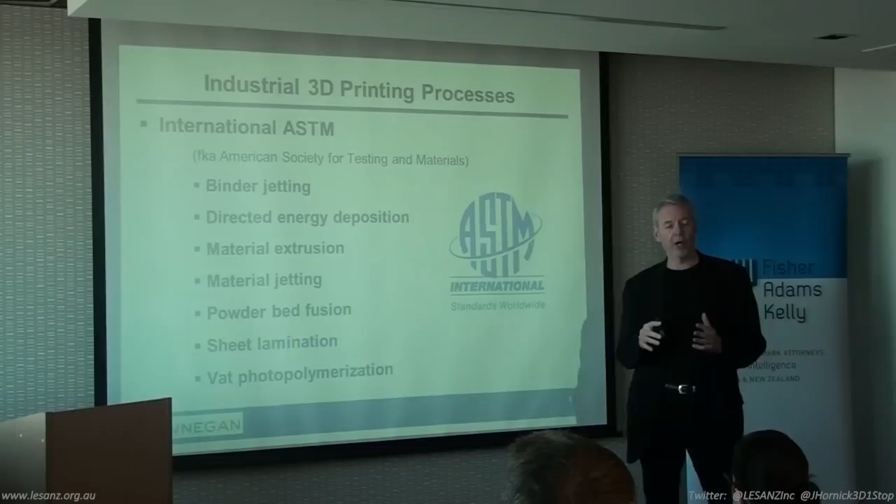These are the official terms. Very few people in the industry use these terms, and often they are not used consistently. I and a few others in the industry are trying to push the adoption of this terminology because it makes it so much easier to understand. I hope you'll see that as I go through this presentation.

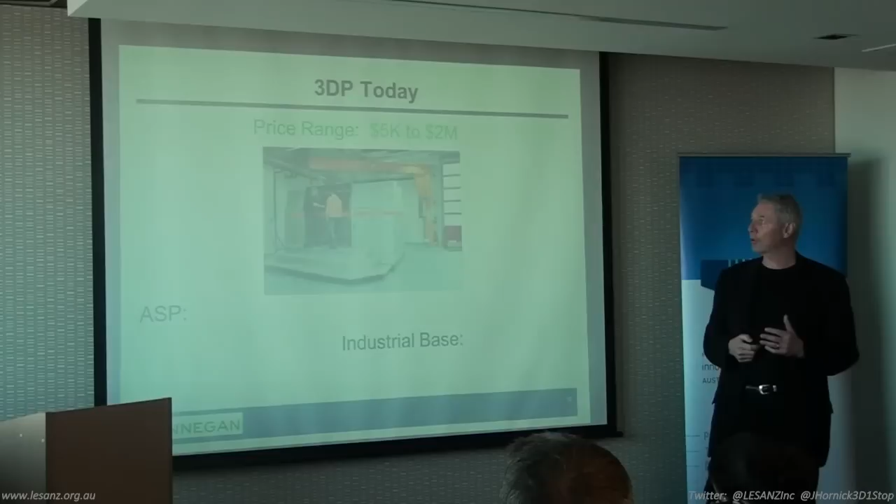Now, one thing I wanted to say about where 3D printing is today, which sets the record straight on this belief that 3D printers are these things that make Yoda heads, is that the price range for an industrial 3D printer—and that's an example of one of them, that's a Concept Laser machine there that you see, and it has a crane, because when you take the piece out of the bed that's made in this machine, or if you're filling up the bed with powder, it weighs 3,000 pounds. So you've got to have a crane to move the pieces in and out after they've been made. And the price range for an industrial 3D printer is anywhere from $5,000 to $2 million.

And the price range for consumer-grade printers is considered to be anything below $5,000. So the industrial machines, basically, they go up to $2 million. The average selling price, as of 2014, is $87,000 US. That's actually down from $90,000 the year before.

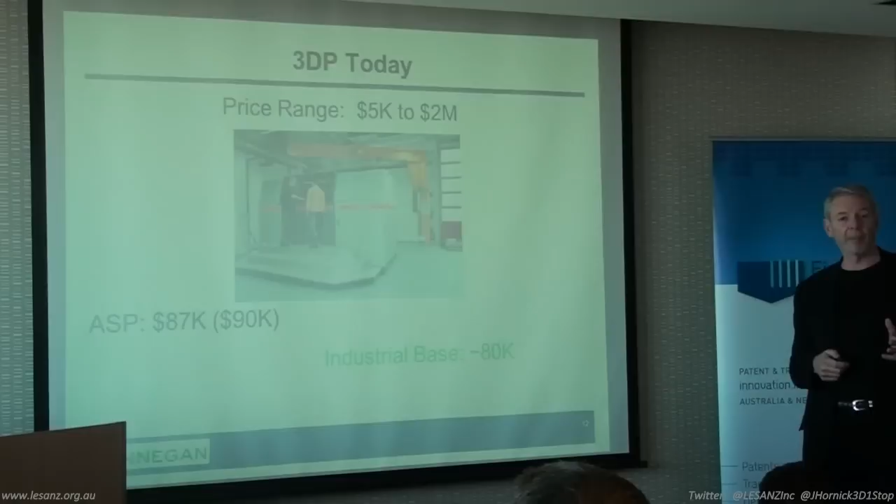And there are about 80,000 industrial-grade machines installed around the world. So there's a lot of them out there, and there are more and more all the time. The number of the prior year, I believe, was 67,000 machines. So there was an additional 13,000 industrial machines installed in 2014.

However, I kind of view the state of 3D printing technology as where the steam engine was in 1765. Now, there were steam engines long before 1765, but it was in 1765 that Watt created the first practical steam engine, and it was a great invention for its time. It was pretty primitive compared to where the engine is today.

And I kind of analogize 3D printers to where the steam engine was in 1765. Now it's not going to take 240 years to get the technology of 3D printers up to where the engine is today, because things are happening at an exponential rate now. But I think the technology is great, it just has a long way to go.

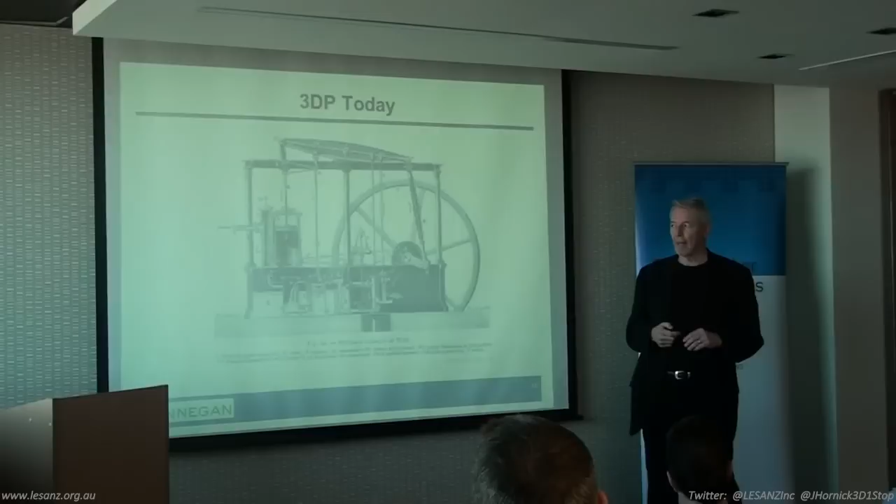Now, the first type of 3D printing technology on that list, and I go through them alphabetically, is binder jetting. Binder jetting is kind of like 2D paper printers, where you're using these inkjet heads, and what you're jetting out of those heads is a binder, and you're jetting it into a bed of powder. That powder could be a polymer, or it could be metal, or it could be ceramic, or glass. So you have a bed of material, and you're jetting the binder onto that material layer by layer, and you're building up a product or a part by gluing it together, essentially.

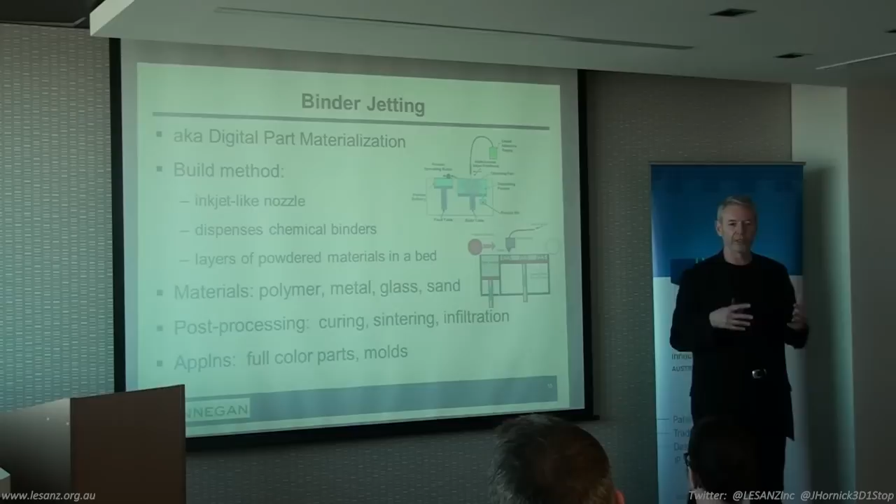And after the parts come out of the machine, they all need some kind of post-processing. Another kind of myth is that when a part comes out of a 3D printer, it's perfect, it's beautiful, you can use it right away, and that's not true.

Every type of technology you'll see today has some post-processing involved. With binder jetting, there's curing, sintering, and infiltration involved. I'll talk about that in a moment. But one of the great things about this process is that you can make full-color parts.

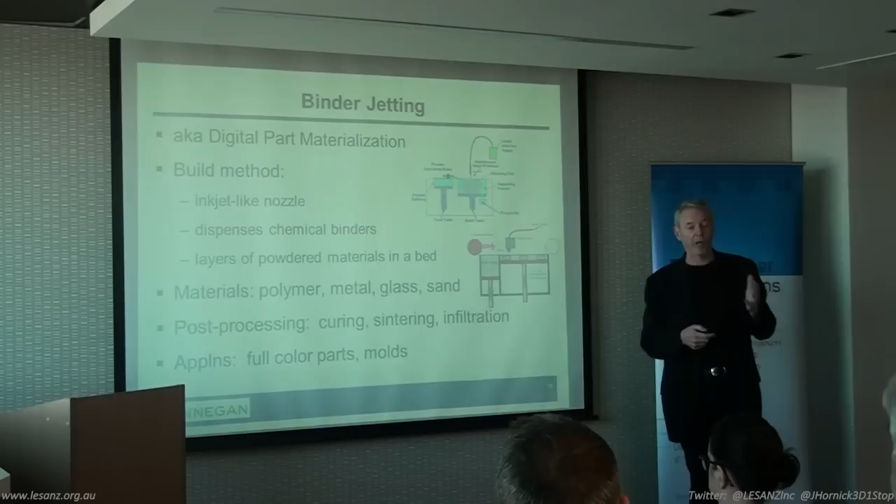Here's some examples. 3D Systems, one of the top players in the industry, is what I call an organic company—it's grown up purely in the 3D printing industry. It's not like an outside company that manufactured products for years and then decided to get into 3D printing, like HP. I'll talk about HP as I go on. 3D Systems is homegrown in the 3D printing industry.

They have machines called ProJet. They're US-based, and they have machines with different build volumes—some are small and some are large, so you can build big things. They build their products with acrylate powder, and that's what's in the bed, acrylate powder.

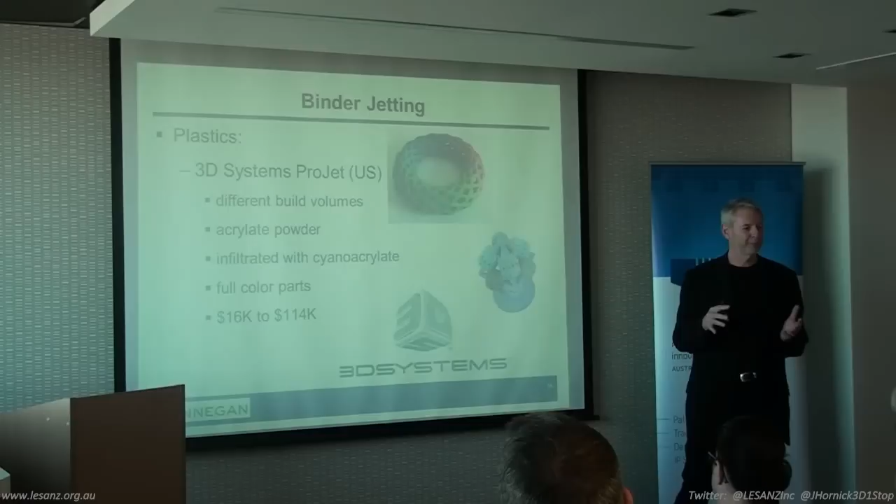After the product is made, it's infiltrated with cyanoacrylate. Does anybody know what that is? It's crazy glue—that's what we call it in the U.S. These machines run from about $16,000 to $114,000. Prices might be slightly varied this year; these are 2013 prices. Now, that's a plastics machine.

Another plastics machine is made in Germany by a company called voxeljet. The beauty of the voxeljet machine is it's continuous build—you start building in one end and the parts come out the other end. They used it to print this James Bond Aston Martin DB5. They made three of these for the movie Skyfall.

This machine uses polymers or sand, and it cures at room temperature, which is great because the products don't need heat treatment—they don't warp. You can see these machines are fairly expensive, $150,000 to almost $2 million.

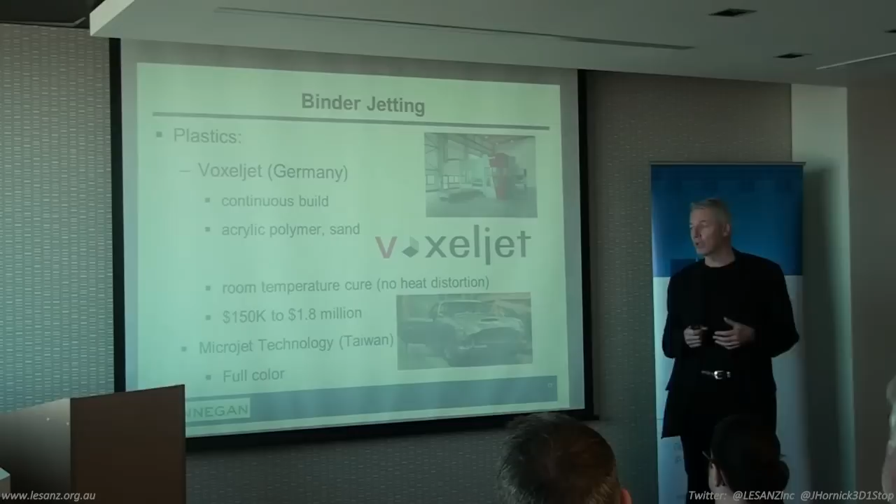There's another company in Taiwan called Microjet Technology that has a full-color binder jet machine. Now there's also metals in this area—it's not just plastic parts.

There's a company outside of Pittsburgh in the United States called ExOne. They also have offices in Germany, and they have a fairly large build volume. As you can see, they use all different types of powders: bronze, Inconel, iron, stainless steel, and also tungsten, glass, and sand. When these parts come out of those machines, they are infiltrated with bronze.

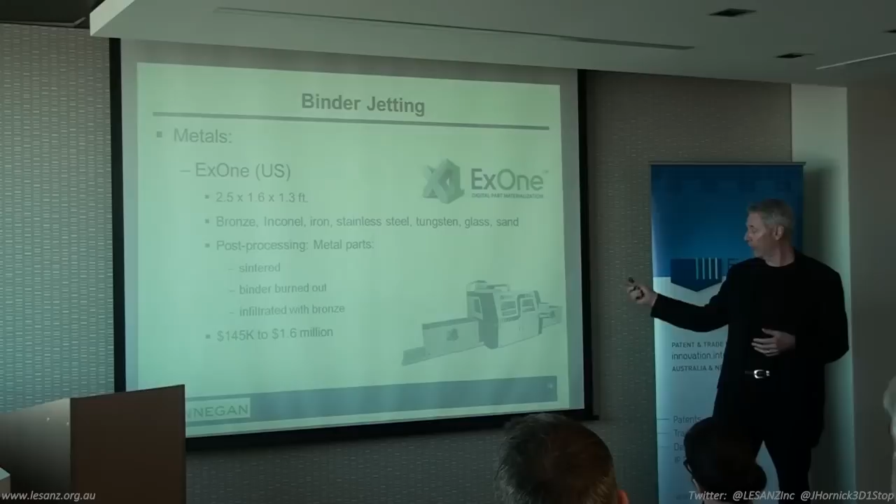First the binder is burnt out—they're heat treated to burn out the binder. Then they're infiltrated with bronze to make the part 98% dense. These machines, again, are expensive: roughly $150,000 to about $1.6 million. As you can see, they're big machines.

Now, this binder jetting technology is what was originally called 3D printing. Eventually, the term 3D printing became an umbrella term for all these different processes. But this is the original, quote-unquote, 3D printing process, which was developed by MIT and licensed to ExOne. It was also licensed to a company called Z-Corp. Z-Corp was later acquired by 3D Systems, and then they sub-licensed it to VoxelJet.

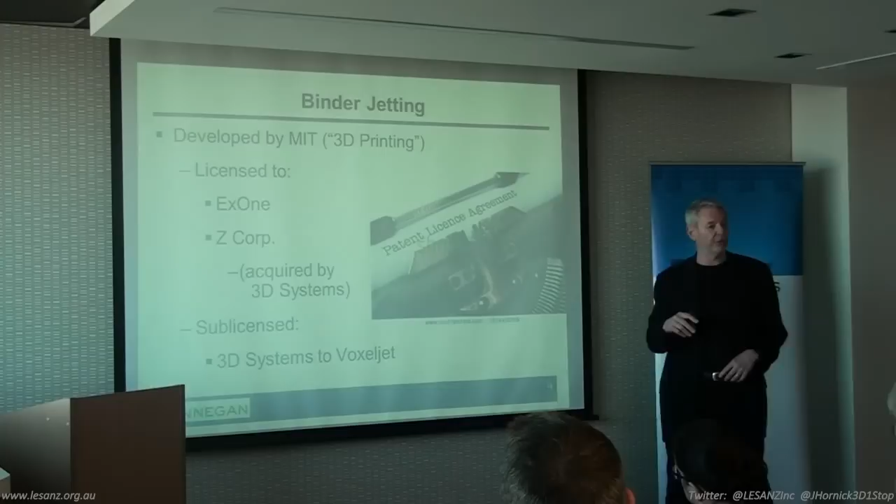So what you can see is that all the companies operating in this space, or almost all of them, are licensed by each other or cross-licensed in some way. That's a good thing in that it has enabled the technology to move forward without litigation, and I think litigation would interfere with adoption. So it's good there hasn't been much litigation. But the bad thing, I think, is that because of the cross-licensing, there hasn't been a whole lot of incentive to innovate beyond whatever technological path they happen to be on.

So they're going down these paths—you have incremental improvements, machines are getting better and better, but nothing amazing or new is coming. This technology has been around for 30 years. Well, this one hasn't, but 3D printing technology in general has been around for about 30 years.

Now, the second type of process is directed energy deposition, also known as blown powder, and also known as laser cladding. Different manufacturers do different types of processes. With binder jetting, each manufacturer is basically doing the same thing—they're spraying a binder onto a powder bed, and they're building up a part layer by layer.

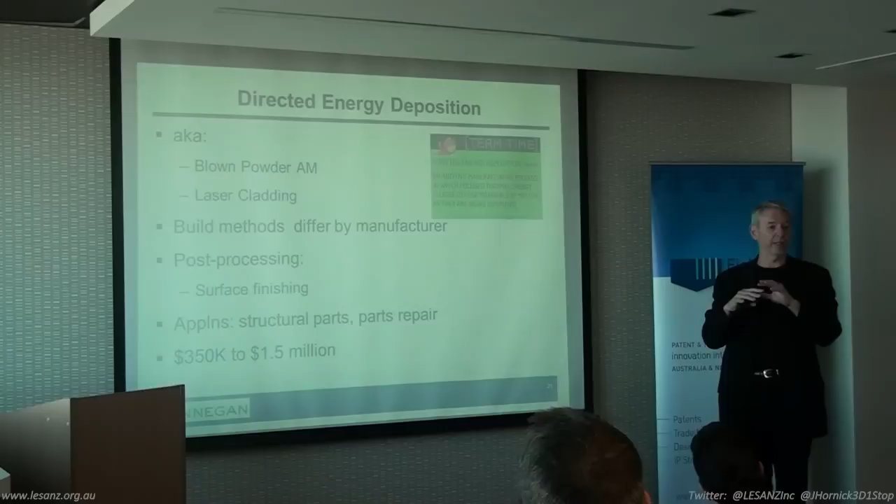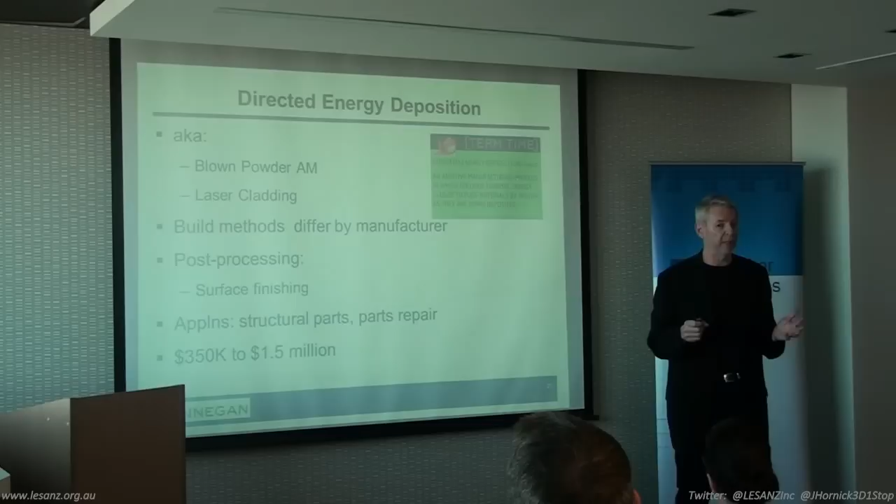With directed energy deposition, you have different manufacturers doing basically different things. The parts that come out of the machines have to be finished, they need some surface finishing done to them. But the parts are very strong, so you can make structural parts, and it's good for repairing parts. These machines range from about $350,000 to $1.5 million.

One of the companies in this space is called Optomec, in the United States, in Albuquerque, New Mexico. They have their own process called laser engineered net shaping, or LENS, L-E-N-S. This is their term, it hasn't become generic, but it is one of these alphabet soup acronyms that you hear. You might hear laser engineered net shaping, or LENS, but it's really a type of directed energy deposition.

Here, what happens is you have these inkjet heads that spray powder through the inkjet head to the focus of a laser beam. So you have a laser beam and the inkjet heads together, spraying powder to the focus of a laser beam and depositing that. You're depositing kind of a fused material with the use of that energy at the same time, and you can build it up in any shape, on any shaped substrate.

This process was actually used by RMIT University here in Australia to repair turbine blades for a company that formerly bought hundreds of turbine blades every few years, and spent hundreds of thousands of dollars to do that. They started using the LENS process to repair those blades or replace them. So this is great for the company that needs the blades. Terrible for the company that sells the blades.

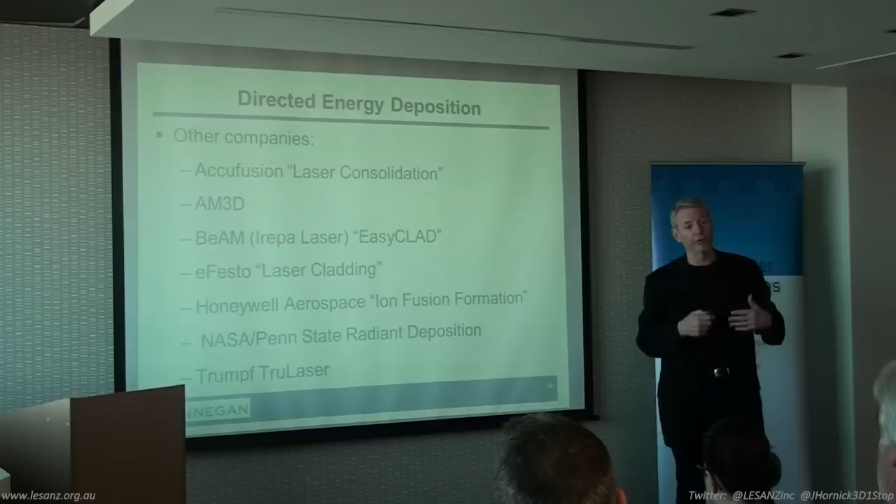There are some other companies in this space, some who sell products and some who don't. NASA doesn't sell a product. Honeywell has something they call ion fusion formation, but they don't sell a machine either, they just use the process in-house.

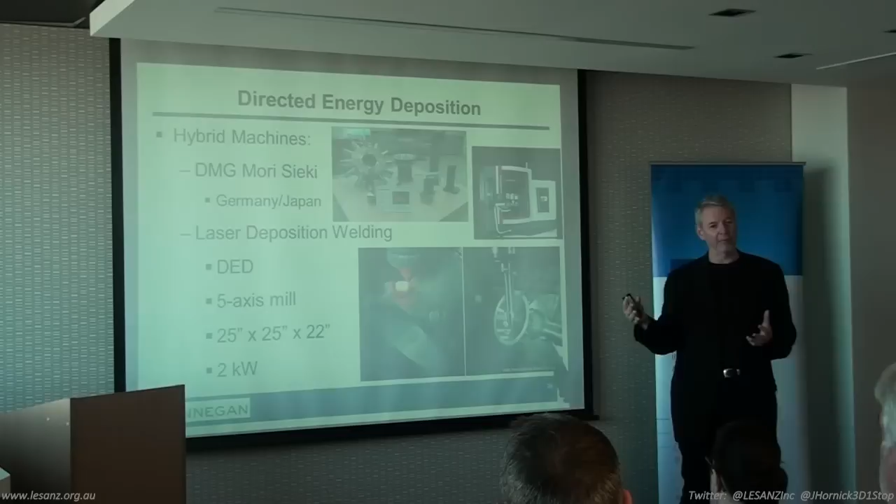There are some hybrid machines. There's a company called DMG Mori Seiki, which is a joint venture between DMG in Germany and Mori Seiki in Japan. Their alphabet soup process is called laser deposition welding, that's their trade name for it, but it's really directed energy deposition. They combine their deposition head with a 5-axis mill, and mill the parts as they go along.

The parts that come out of this machine are just beautiful. This is a rough part, this is what it looks like when the material is being deposited with the directed energy deposition process, and this is what they look like after they've been milled as they go along.

And they're just beautiful parts that come out of this machine. Yamazaki Mazak just came out with a machine that's very similar. It combines a milling machine with a directed energy deposition head.

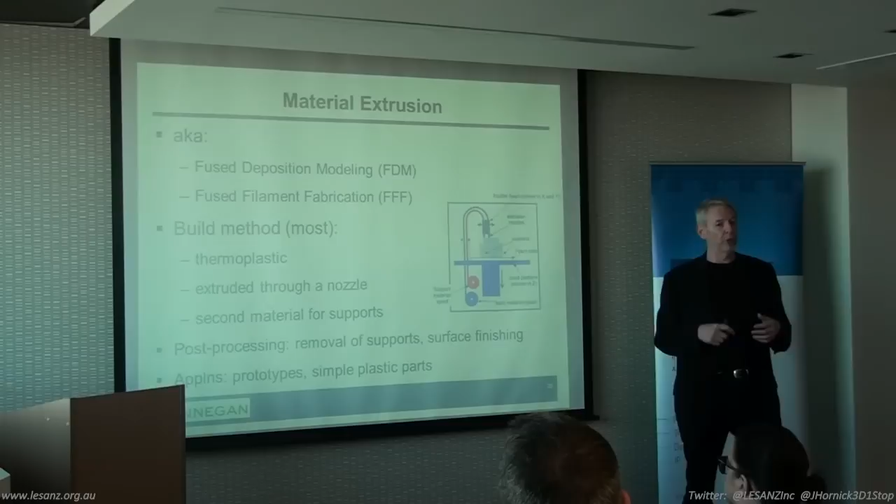Now, material extrusion is the next type of process on the list, and this is also known by some alphabet soup names: fused deposition modeling, FDM. That's what you hear most commonly, and that's what people use mostly in industry. Also, you'll hear fused filament fabrication, FFF. But again, it's all a type of material extrusion.

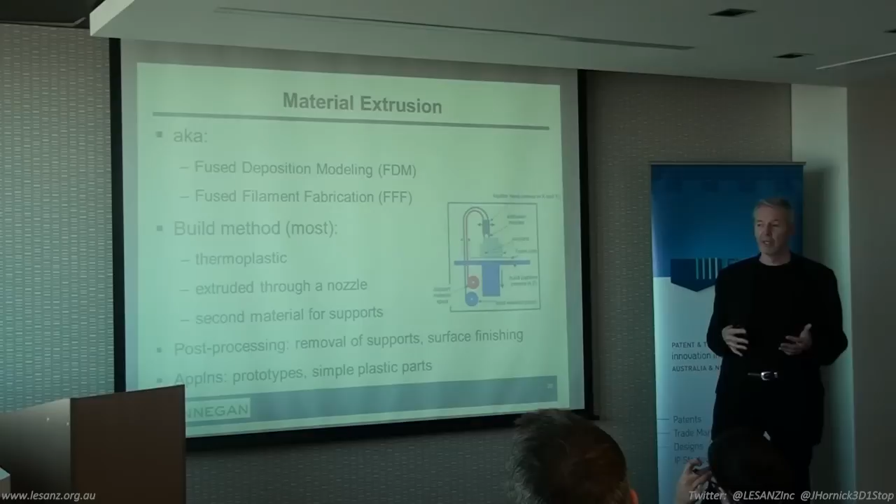Here what's happening is the thermoplastic is being extruded out of the heated extruder head and onto a print bed. The print bed may be heated or not, depending on the material you're using. If you're using PLA, the print bed is not heated. If you're using ABS, it is.

In this process, you may also be extruding a second material through a second print head to have support. So if you're building anything with an overhang, you have to build supports under it so they don't droop. After the part is made, you remove that support material. It's often soluble support material, so it's removed with either water or a solvent.

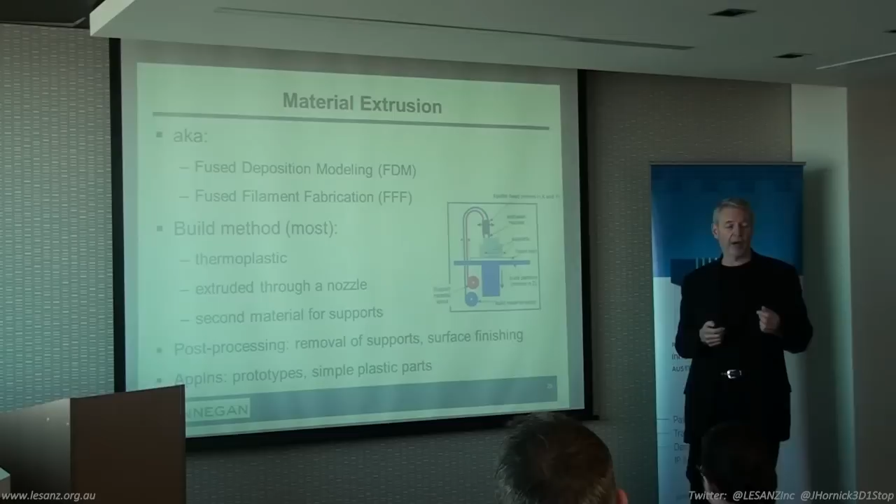And again, these parts need to be surface finished as well when they come out. You know what these look like—the Yoda heads that come out of the consumer grade machines. On the industrial level, there's much finer resolution, but you can still see the layers, and you need to do surface finishing. So these types of machines are great for prototyping and for certain types of end-use parts, if they're just simple replacement parts like a handle or something like that.

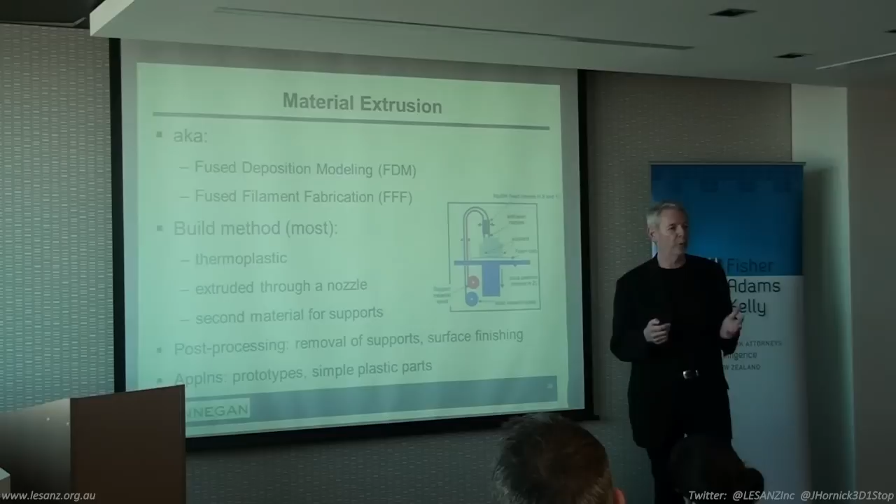There are all different types of thermoplastics used here. Some of them are proprietary and some aren't. This is the most used 3D printing process in the world for two reasons: one is because of all the consumer grade machines that are out there, and the other is because the high-end machines out there are used for prototyping.

Up until a few years ago—and this technology has also been around since the 1990s—all of the work done in this area was called rapid prototyping or direct digital manufacturing. It's only been very recently that everyone started calling it 3D printing or additive manufacturing. But this is the type of machine that's been used for rapid prototyping for many, many years.

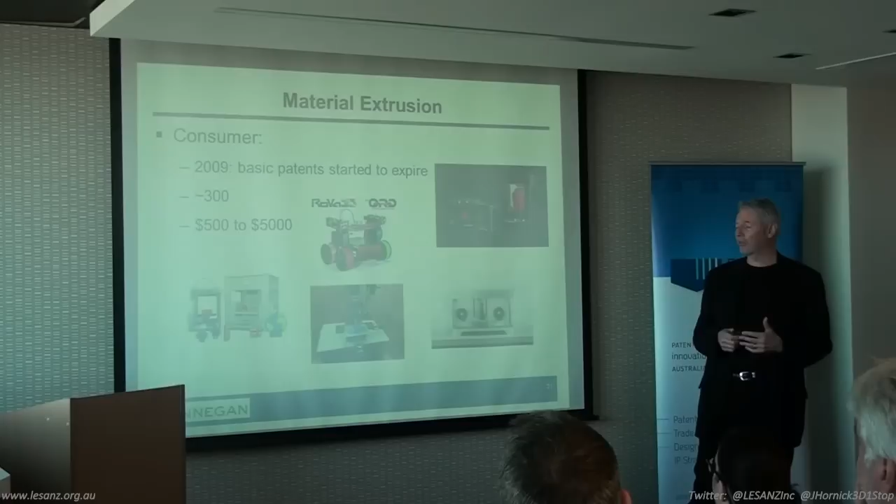Now, even though this presentation is about the industrial side of 3D printing, I just wanted to give you a flavor of the consumer side. These are consumer machines, and in 2009, the basic patents in this space started to expire. Stratasys had the first patents. In 2009 they started to expire, and even slightly before that, some startups started to enter this space, especially open source.

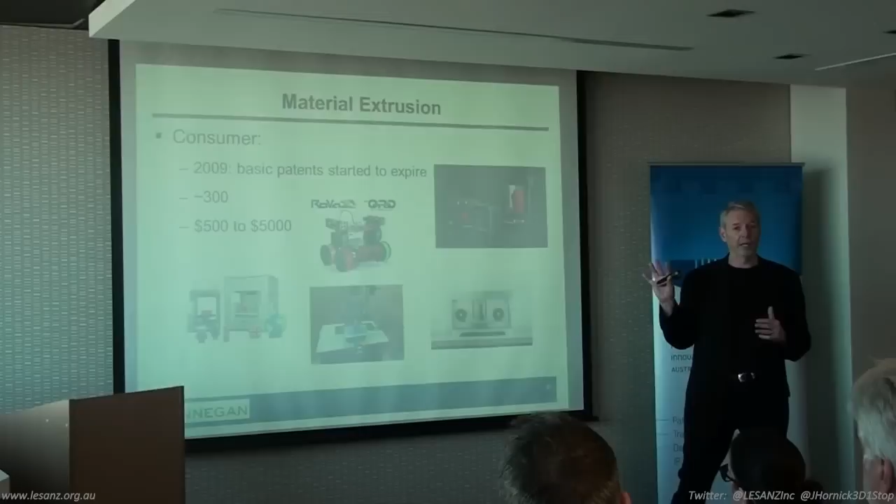So there's at least 300 companies out there making consumer grade machines—at least 300. They're almost uncountable because many of them are startups doing Kickstarter campaigns or Indiegogo campaigns, and nobody really knows how many they're selling or even how many there are. They're all over the world, everywhere. And these machines go for $500 up to $5,000.

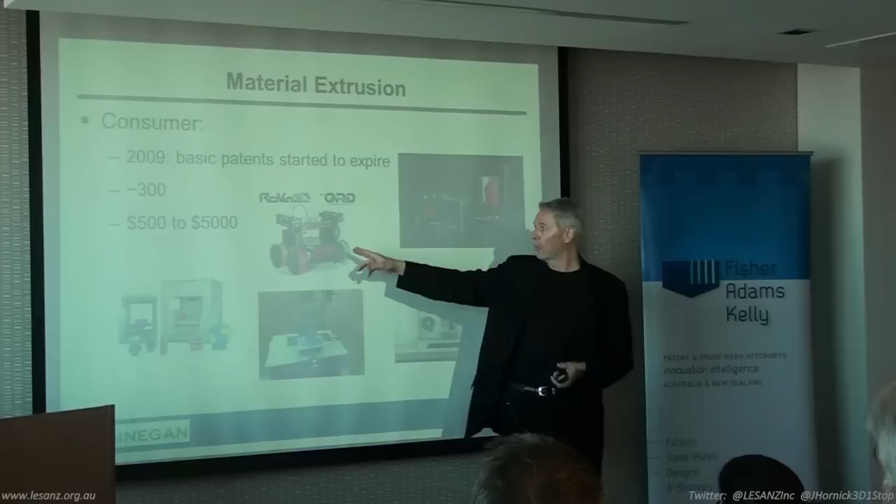I've given you a couple of examples. This one here is called the Rova 3D. It can print in 5 different materials, 5 different colors, at the same time. That one's, I think, a little less than $5,000.

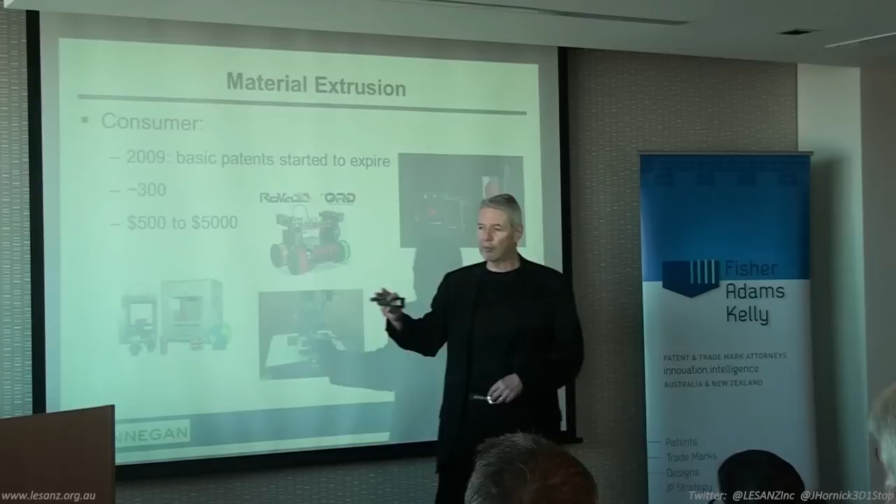These are the 3D Systems machines, and they have machines that run from about $1,200 up in the consumer space. And then here we have MakerBot.

This is a well-known brand, now owned by Stratasys. It started out as an open source project when—or maybe shortly before—they were acquired by Stratasys. They closed their system, filed a bunch of patent applications, really annoyed everybody in the industry who said there's plenty of prior art for this out there, but that just created a huge burden for the open source community to challenge these patents. They have a range of machines that run from about $1,800, $1,900 up in the consumer space.

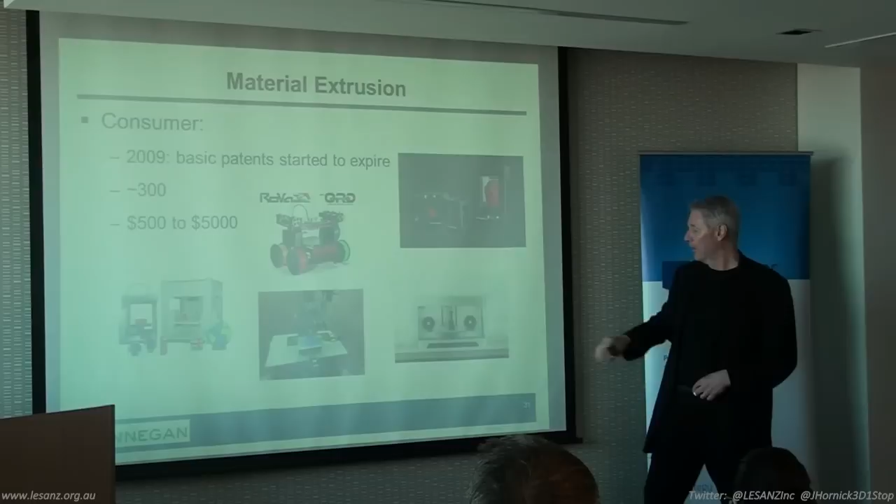This machine here is called Markforged 3D. It extrudes both thermoplastic and carbon fiber filaments, so you can reinforce whatever it is that you're making with carbon fiber. And this one sells for about $5,000.

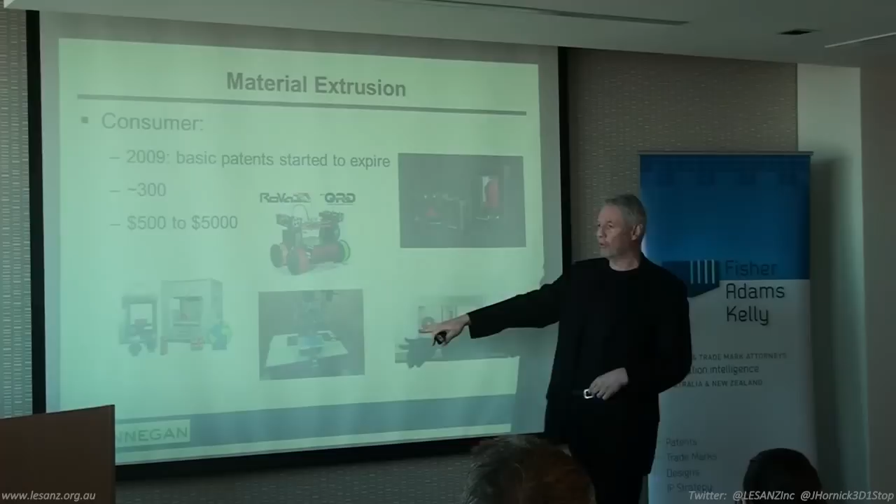This one here is very interesting - this is the Luminar Tribot, which sells for about $5,000. It combines material extrusion, CNC mill, and injection molding into one consumer-grade machine, which is pretty exciting. So that's taking a look at the consumer side of material extrusion.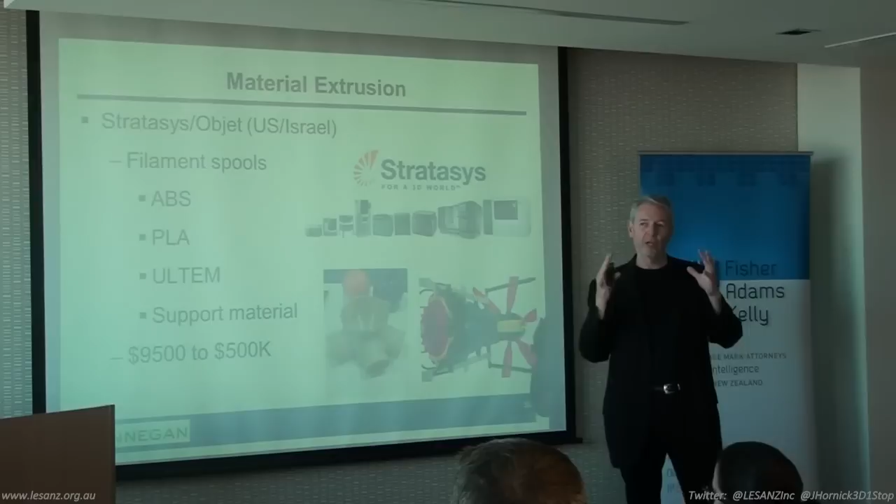Now on the industrial side, we have Stratasys, which I'd say is the top player in this part of the industry. It was a US company from Minnesota that merged with an Israeli company called Objet. Objet is really the tail wagging the dog, so this is now considered an Israeli company. At one time, the big chunk of the material extrusion market was US; after that merger, the big chunk is now Israel.

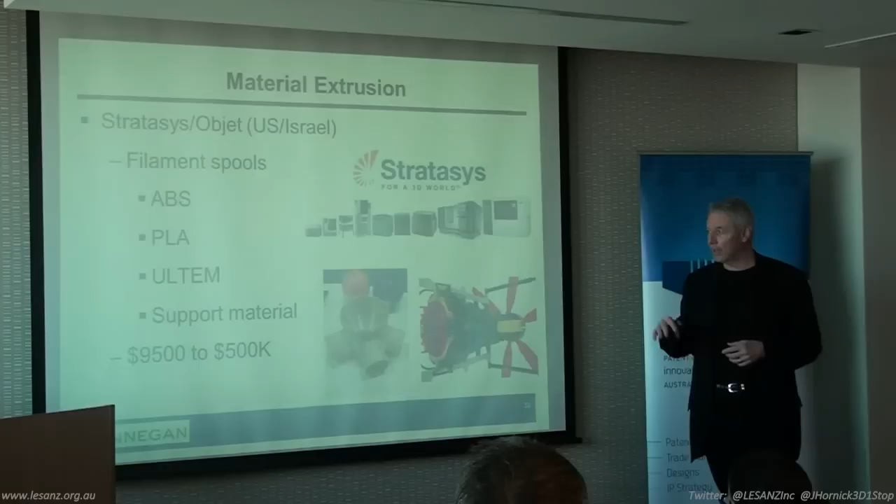They have a whole range of machines of different sizes. They 3D printed this prototype of an engine using a material called ULTEM, which has great fire and smoke resistance. The material comes in spools fed into the machine, and they also support support materials, like I said before, for building with an overhang. The machines run from about $10,000 up to about $500,000.

Now there's a company in Germany called Arburg, which makes what they call a Freeformer. It has a stationary nozzle and a 3 or 5 axis bed. The bed moves, the nozzle stays still, and it deposits droplets of material at very high speed - so it's kind of spraying out droplets rather than extruding through a nozzle, shooting material out at high speed. It's similar to a process called ballistic particle manufacturing, which I'll get to in a couple of minutes.

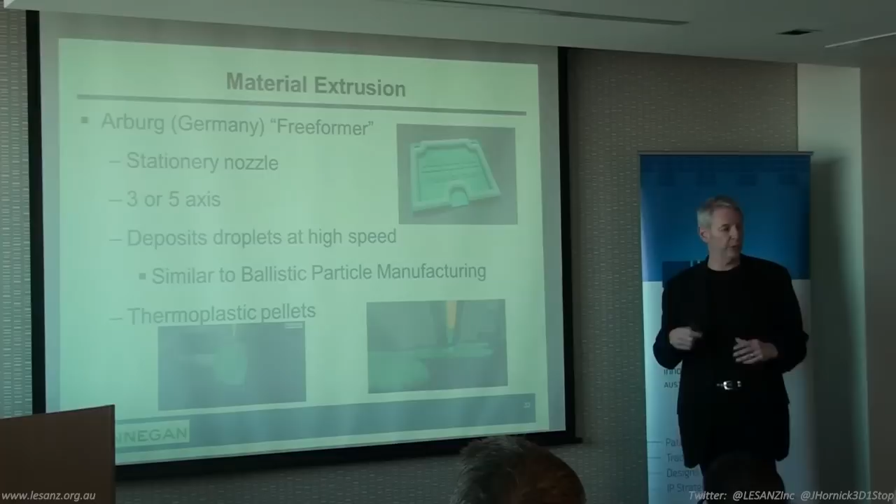What's significant about this machine is it doesn't use rolls or spools of filament. Instead, it uses injection molding pellets, thermoplastic pellets used in injection molding machines, so the cost of materials is much, much lower. But I think the parts built up with this machine are actually fairly primitive and rough, so it's hard to say what kind of market they're going to have.

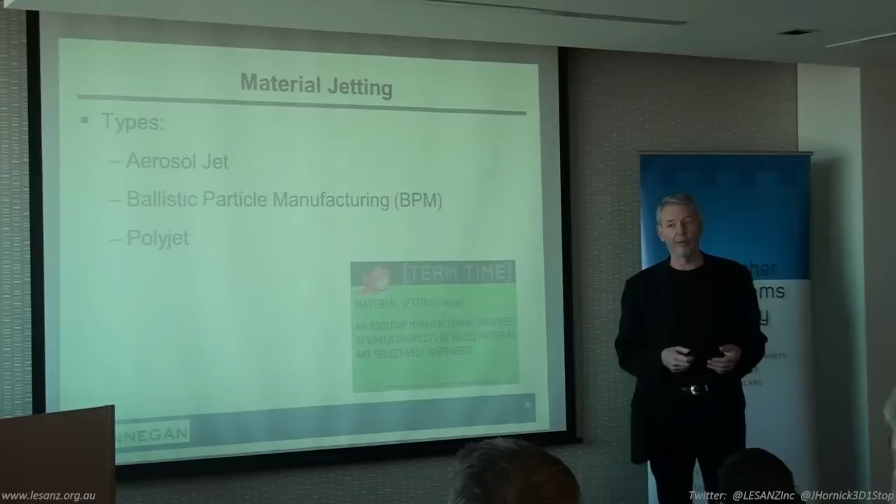Now, material jetting - remember at the beginning I mentioned binder jetting, where you're spraying glue onto a bed of powder, building up the part layer by layer. Material jetting is actually jetting the material itself through a print head, like you'd have on a 2D printer. There are different types of material jetting processes, just like with directed energy deposition, where there are also different types of processes.

One of those is aerosol jet - I'll talk about that. The other is ballistic particle manufacturing, and the third is PolyJet.

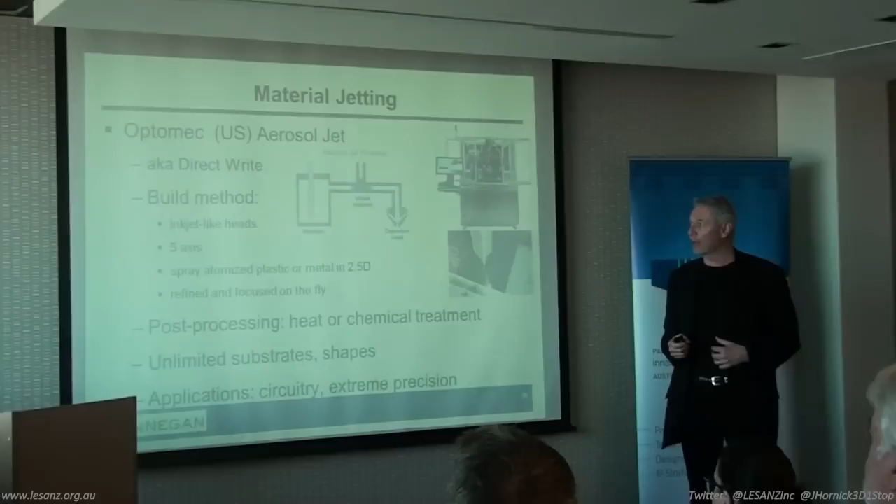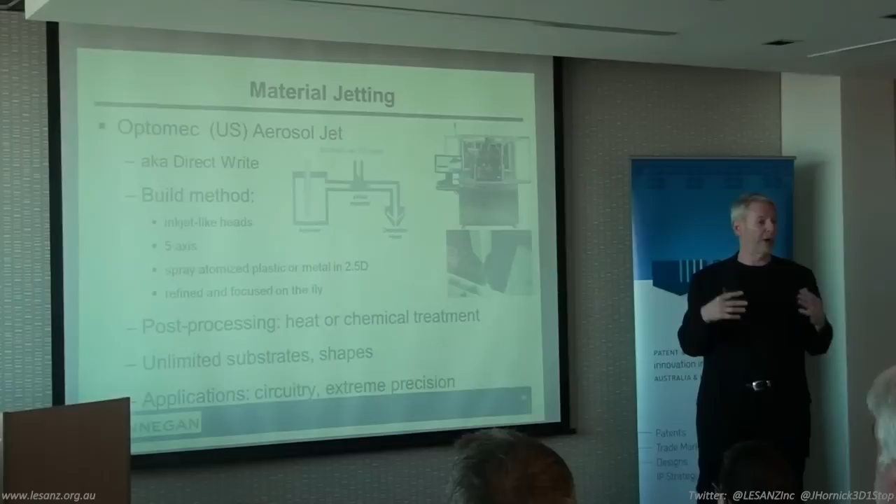Now, Optomec, which I mentioned earlier because they have a directed energy deposition process - a US company - they also have an aerosol jet process. The alphabet soup used here is direct write, or DW, so companies that do this type of 3D printing are often called direct write companies. The method is that you have heads like inkjet heads you'd have in a 2D printer, and they're spraying out the material itself.

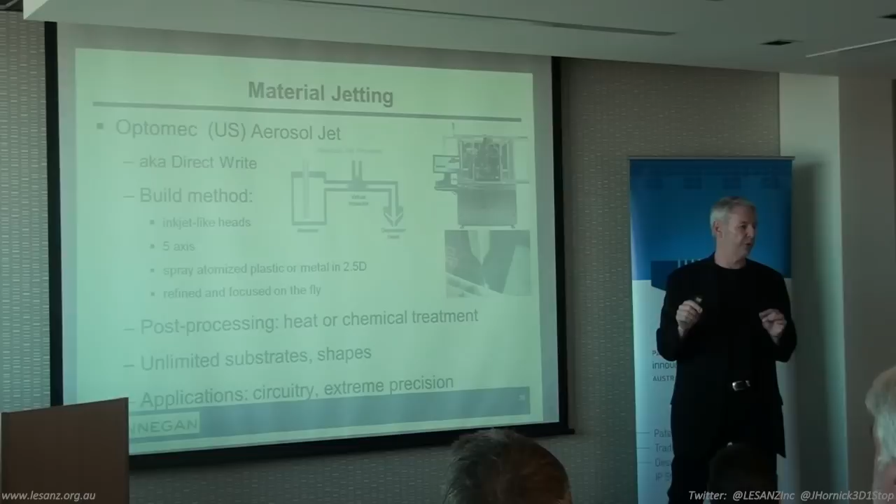Onto a print bed, it's really sometimes referred to as 2.5D printing - I'm talking about this type of material jetting called aerosol jet. This process is often used for repairing things or for printing circuitry. So basically you have some thickness to what you're printing, so it's not purely 2D, but it's also not building up a 3D product, so it's often called 2.5D. You can print onto any substrate, any shape. It's great for when you need extreme accuracy, and great for circuitry. The post-processing here is heat or chemical treatments.

Now, there are some other direct write companies out there - strangely, 3 of them are in Israel. One's called Camtek, there's also one called XJet and Nano Dimension. There's a company called Argentum, which I thought until very recently was a US company, but this is actually a consumer-grade electronics 3D printer maker that's an Australian company that has just moved to the US.

And the reason I know that is, Bob, you sent me an article just a few days ago saying this company was moving from Australia to the US, and you said it's a common problem, right?

Until I got that article, I thought this company was a US company. But what they've created is a consumer-grade PCB printer, printed circuit board printer, that sells for about $1,400. They had it on a Kickstarter campaign, and the machine is called an Argentum. I think the company is called Cartesian, and they started out here and are apparently moving to the US.

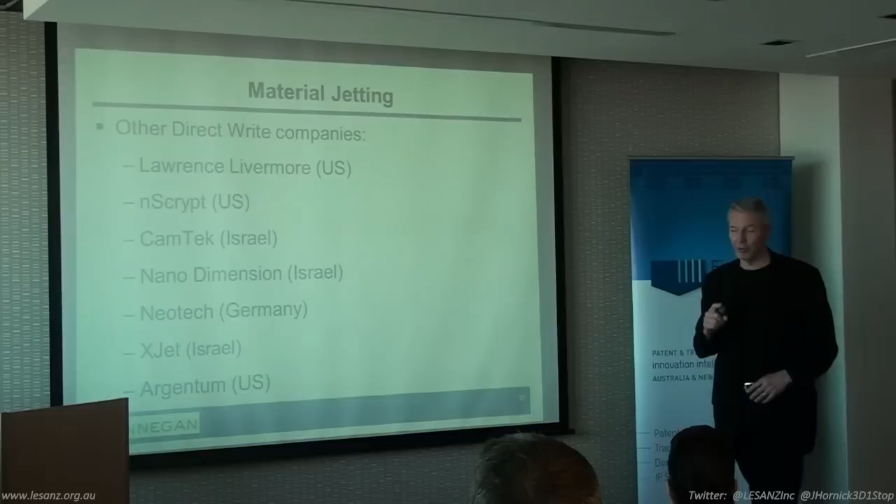They have not delivered any of their printers yet, though. The Kickstarter campaign was almost 2 years ago. So I think they're here in Brisbane, or they were here. They were in Brisbane, and now they're moving to the US. But again, I don't think they've delivered my printer. I don't think they've delivered any printers yet.

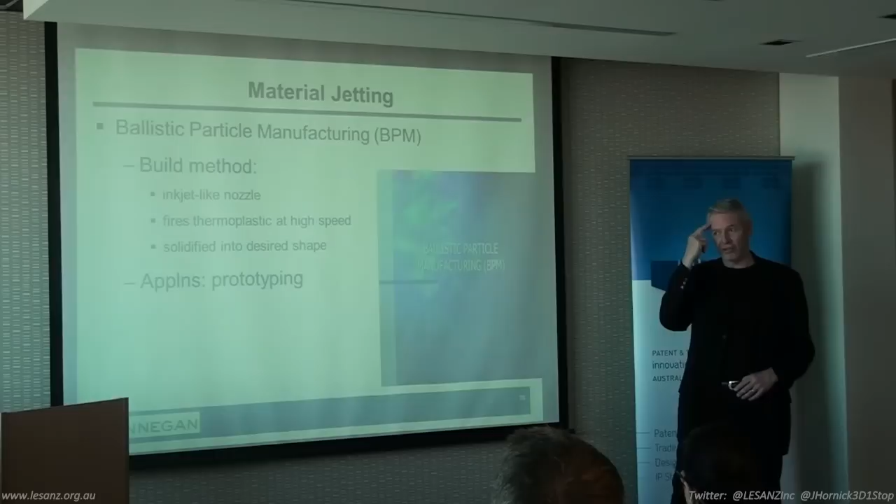Now, ballistic particle manufacturing (BPM) is a type of material jetting process that, as far as I know, no one is doing now. But there was a company called BPM in South Carolina in the United States doing this process. Here you had an inkjet-like nozzle firing thermoplastic at really high speed, and just from the firing of the material you were building up a part. They were doing this with plastics. I'll tell you why that's important in a moment. This was good for prototyping, but you got kind of rough parts out of it. Like I said, there was a company called BPM in South Carolina in the US.

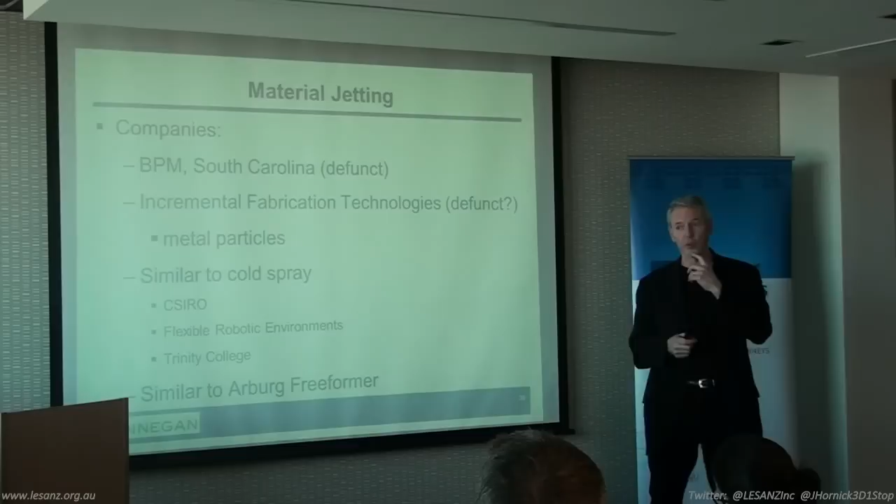It's out of business. There was also a company called Incremental Fabrication Technologies that was doing this with metal, and I believe they're extinct. I can't find any evidence that they still exist. But what's significant about this, I think, is that it's very similar, at least what Incremental Fabrication Technologies was doing.

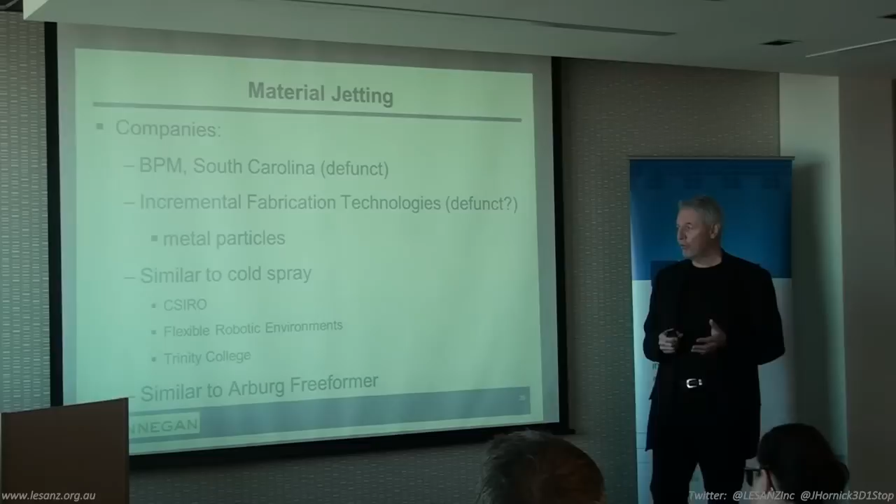It's similar to what CSIRO is doing in its cold spray process. CSIRO has taken cold spray, which has been around for years, and developed their own proprietary process around it. They're doing some incredible things, which I'll show you a little bit later. There's a company in South Dakota in the US doing cold spray called Flexible Robotic Environments, and then Trinity College in Ireland is also doing a version of cold spray.

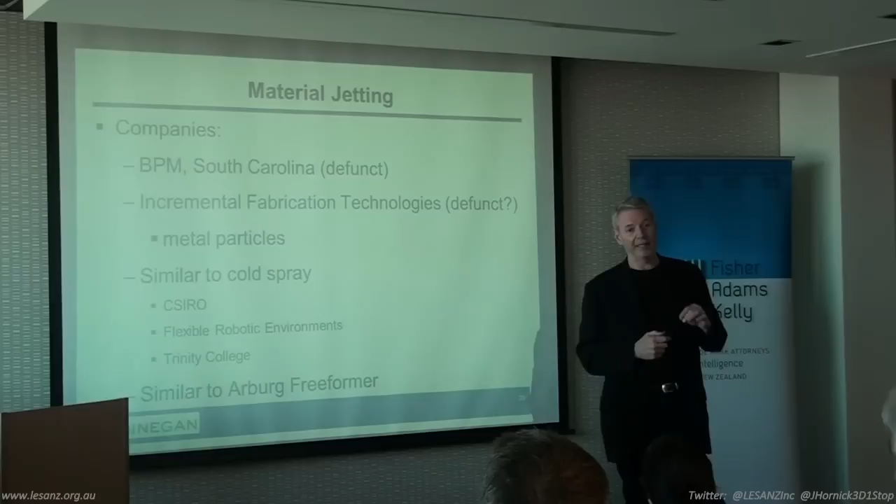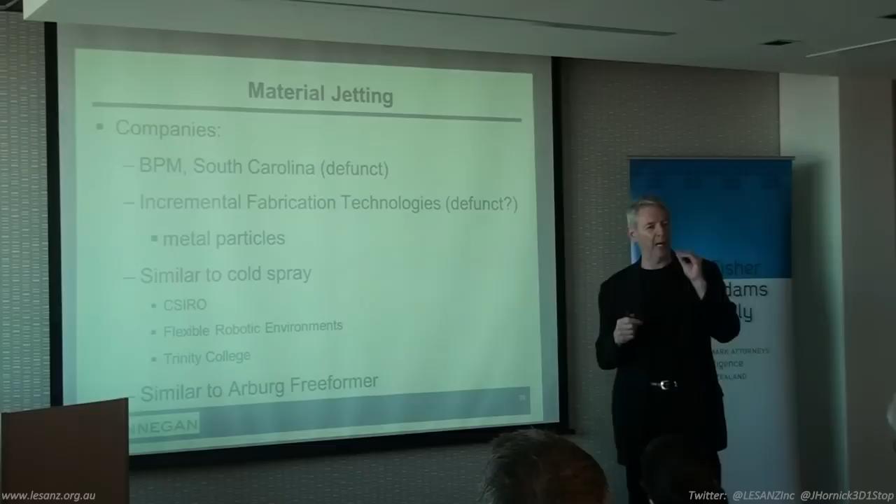What they're doing there is spraying metal powder at high speed and building up parts from it with no heat at all. Just the velocity of the particles causes them to plastically deform and bond. You build up these incredible parts just by hitting powder into other powder with no heat involved at all. It's pretty incredible, and it's similar in some respect to the Arburg Freeformer, because that's spraying out particles of powder as well. So I think what's important about all of this really is prior art. To the extent you run into any of this and you're looking at what came first and what's patentable and what isn't, well, all of this is related to each other.

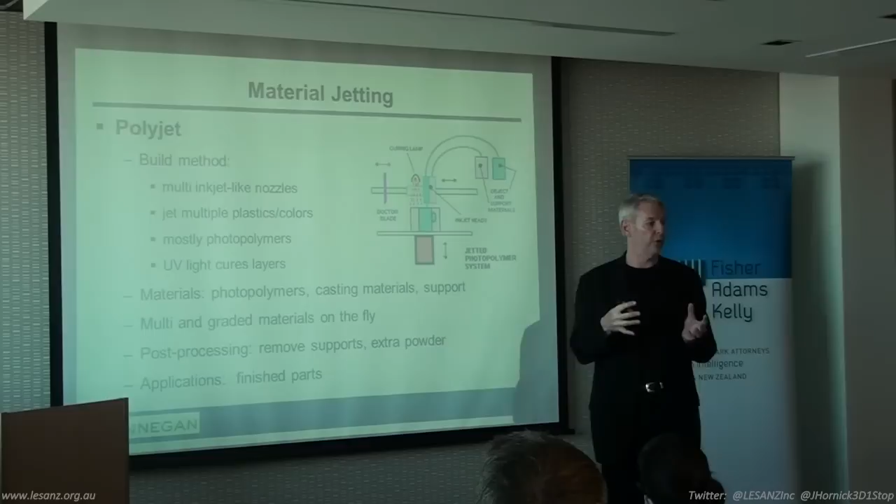It's worth considering. Now, PolyJet is a different type of material jetting. It's not what we were talking about before, not aerosol jet, not direct write. Here you actually have multiple inkjet-like nozzles spraying material from different directions out of different nozzles, building up a part using those multiple nozzles. They're using mostly photopolymers, and then they're being UV cured as they're being built. Here the great thing is that you can make hybrid materials as you go along. I'll show you examples of that in a moment. Post-processing is to remove supports and excess powder, but you can make finished parts.

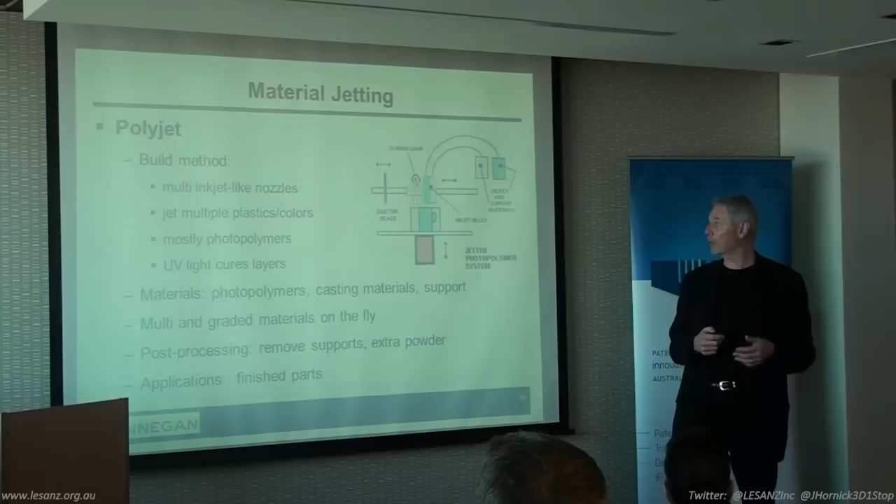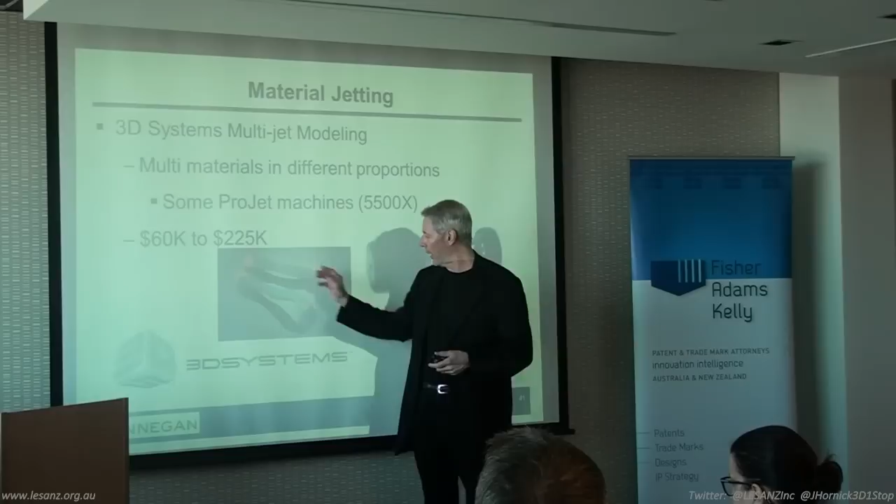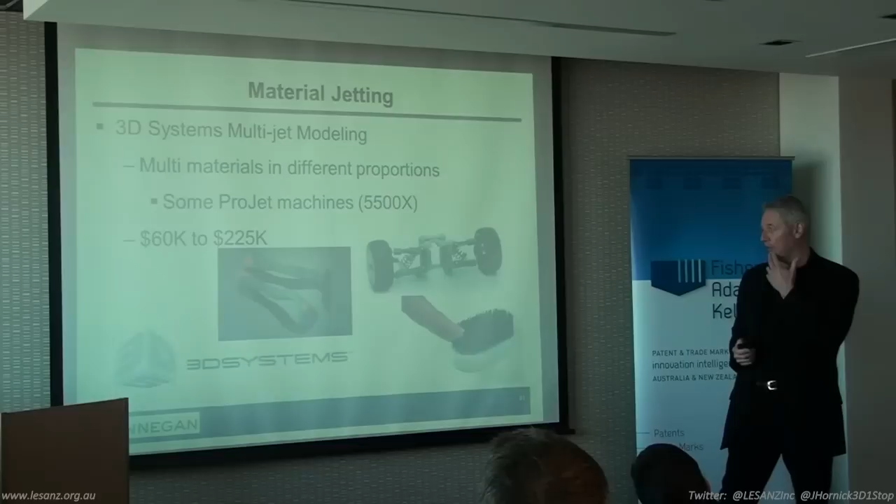3D Systems is one company that has a material jetting process, and you can spray different materials in different proportions and create hybrid materials on the fly. So you can have a part of a product that is rigid and part that is flexible, all in the same build. You're changing the characteristics of the material as you're spraying it, as you're jetting it, so you have rigidity when you need it, flexibility when you need it. Same thing with this razor here: flexible razor handle and rigid where it has to hold the blade and buttons. This is all one build. These machines are not nearly as expensive as metal machines—they go from about $60,000 to almost $225,000.

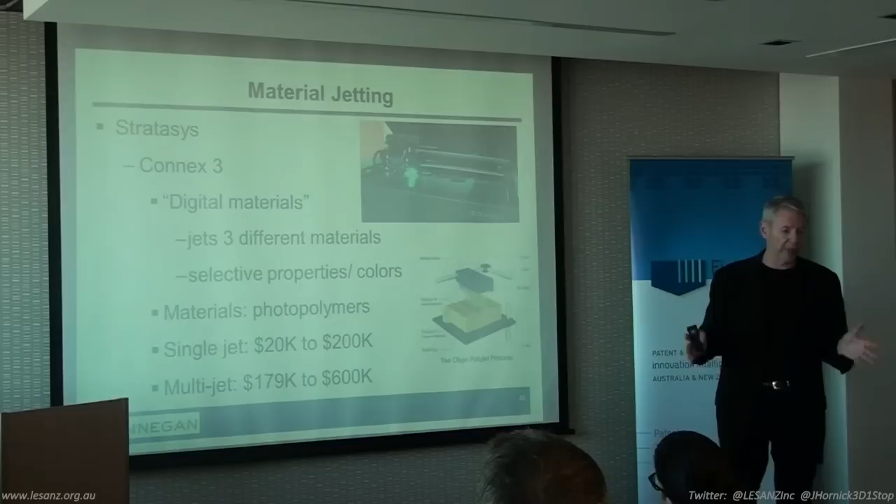Stratasys is also in this space. They probably have the more sophisticated technology. Their Connex machine is kind of like a benchmark machine. They talk about creating digital materials on the fly because they can print or jet 3 different materials at the same time and decide what their properties are as they go along. As I said before, they could be flexible or not, or changing colors as they go as well. These machines run from about $20,000 to $600,000 depending on the size of the build chamber and also on whether it's multi-jet or single jet.

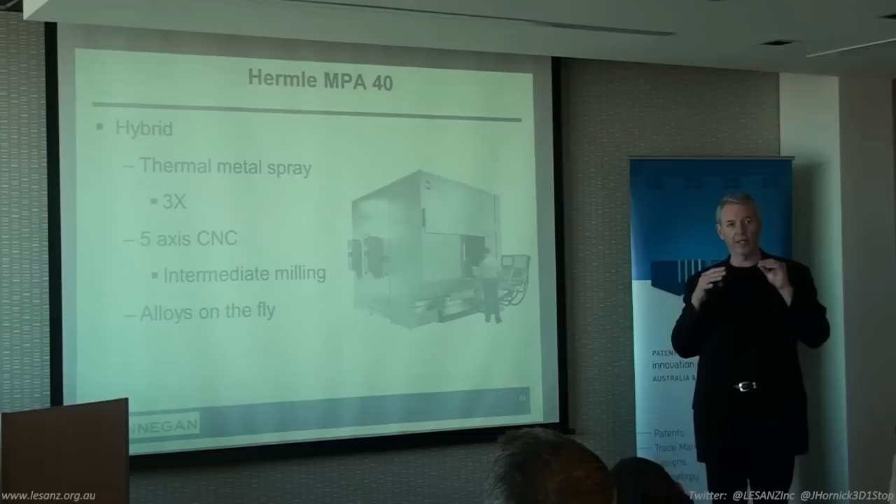Hermle has just come out with a machine in this material jetting space, and they call theirs thermal metal spray. They're doing what cold spray is doing, except they're using heat, so they're just spraying material, metals or powder, at 3 times the speed of sound. They have a 5-axis CNC mill and do intermediate milling of the layers as they go along. They're able to use this to create alloys as you're building, spraying material and causing it to bond with the use of heat.

Now that was material jetting. Now we get into powder bed fusion, and powder bed fusion is where most of the functional end-use metal parts are coming from, although this can be done with plastics as well. This is where you see the real alphabet soup of 3D printing.

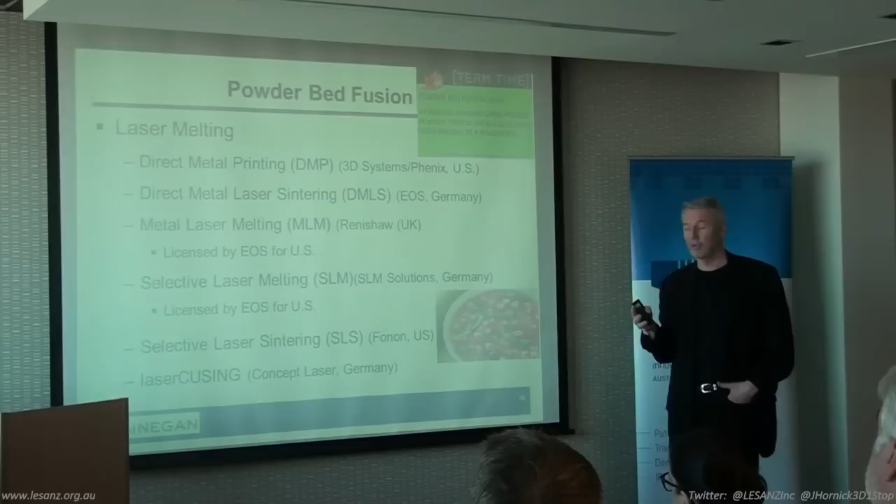We have 3D Systems that calls their process direct metal printing, or DMP. We have EOS in Germany, which calls their system direct metal laser sintering, but other people use it too, even though that's their trade name. I don't think it's really protected, and it's kind of commonly used in the industry to refer to a metal powder bed process that involves a laser, even though it's kind of EOS's trade name. Then Renishaw in the United Kingdom has metal laser melting, or MLM, and then there are plastic and metal processes called selective laser melting or selective laser sintering at various companies in Germany and the US. And then there's a company in Germany called Concept Laser, and their process they call laserCUSING. But all of these trade names and all of these quasi-generic names and all of these acronyms, they all fall under the heading of powder bed fusion.

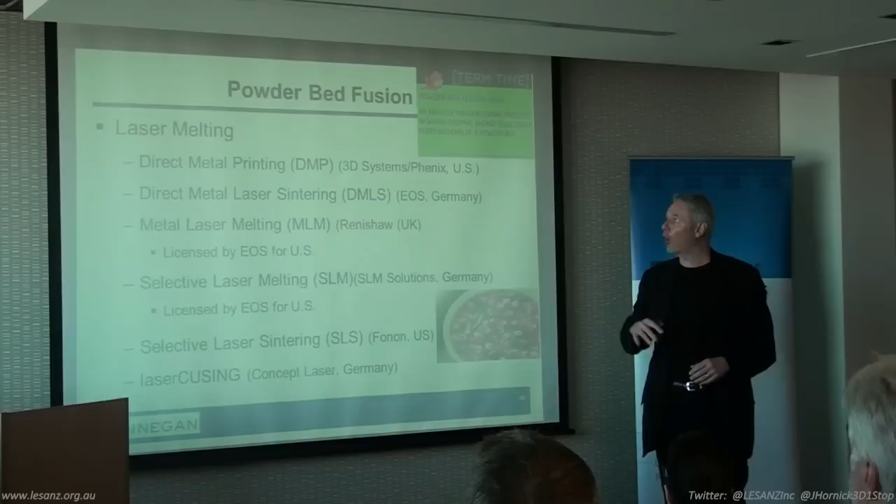And what powder bed fusion is - there are some other companies that do this as well around the world, one in Germany, a couple in Germany, several in China. And these are the expensive machines, 160,000 to almost $2 million.

The way these machines work is you have a bed of powder, and it can be a bed of metal powder or a bed of plastic polymer powder. Then you point a laser at it, and you fuse the metal in the bed layer by layer with that laser. So you're building up the product layer by layer by pointing a laser at the bed of powder. These parts have to be anchored to the base because otherwise they will warp, and it's all done in a vacuum. In many cases, the surrounding powder actually provides support because it's in a bed of powder. So if something's being built up out of the powder, it's still got powder all around it because it's only applying the laser where it's really needed. So you don't have to worry so much about overhangs or providing support material - they're naturally supported by that powder underneath as it's being built up.

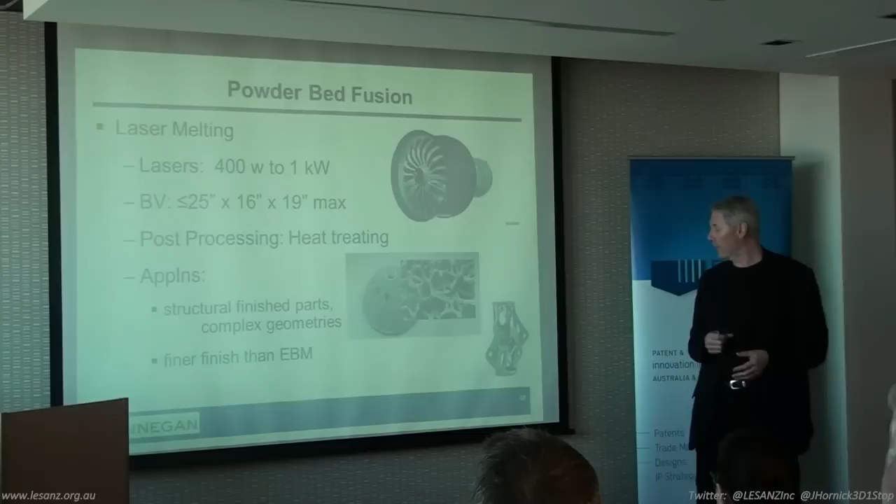This is an acetabular hip cup. They're installed in about 50,000 people around the world who have had their hips replaced with these cups. They have a semi-porous surface structure so that human tissue can grow into the pores, and so it can become part of the human body. They're made out of titanium.

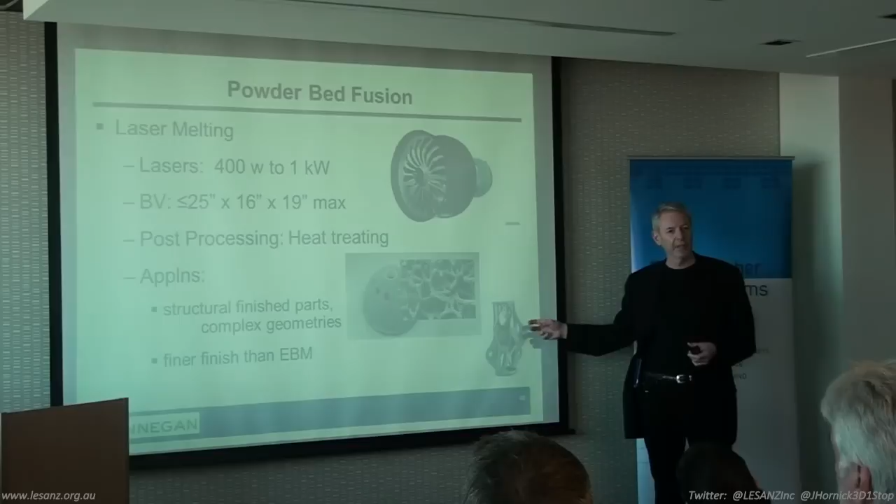This is a bridge strut, which was made by design through topological optimization, so that you only have material where you need it. Parts designed and made this way really, I always say, look like they were grown, not made. They look like they were grown. And this is one of the beauties of not only 3D printing, but also combining that with topological optimization and using powder bed fusion processes - you can make parts that don't look like any part you've ever seen before. They just have the strength where they need it. They're a lot lighter. You've gotten rid of a lot of material, so they're fundamentally cheaper to make.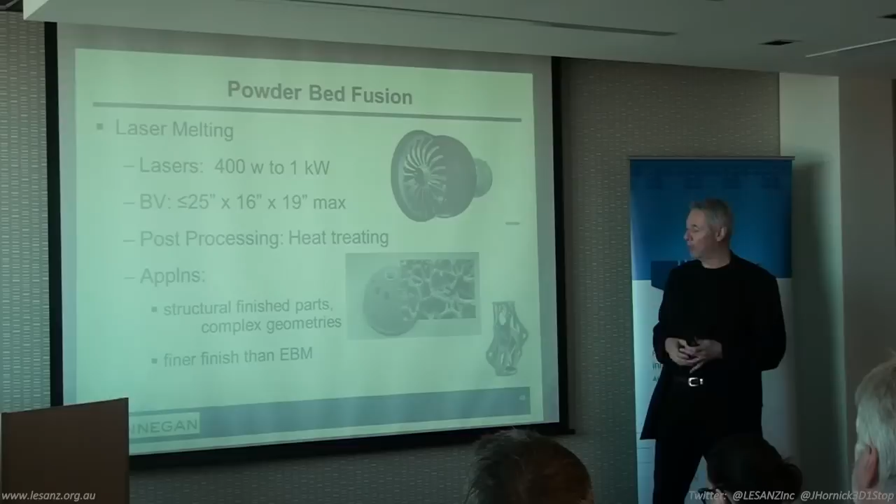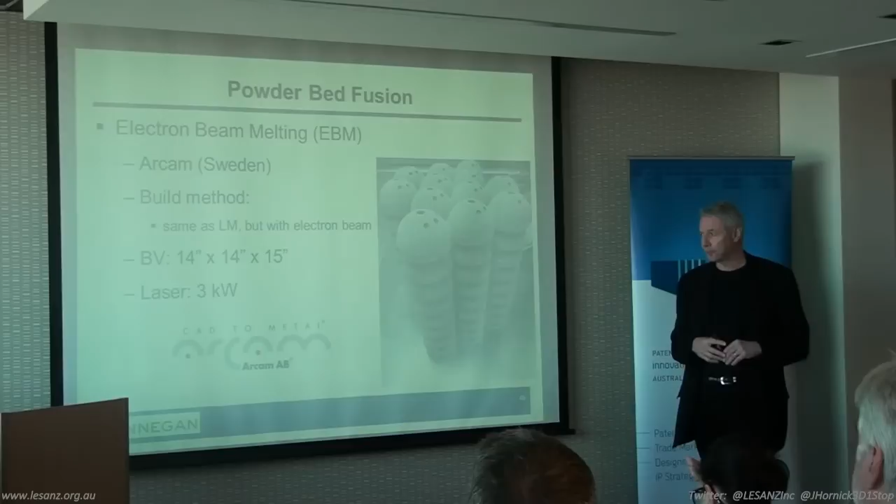Now, another company that does a similar type of thing is Arcam, which is in Sweden. Instead of using a laser, they use an electron beam. They're doing exactly the same thing with powder bed fusion as with the laser beam, except they're doing it with an electron beam. And this photo is significant because this wasn't a situation where they made all of these acetabular cups and then stacked them up for this photo. They were built this way, in the build chamber like this.

So when people say you can't use 3D printing, or it's not practical for mass production, that may be true. But for a situation where you need part production - not a tiny amount of quantity, but not a huge amount either, kind of in the middle - you can really build as much in your build chamber as will fit.

Now, electron beam melting - Arcam only supports titanium, but companies are experimenting with using their machine with other types of material, including CSIRO. I visited CSIRO the other day, and they have an Arcam machine. And even though Arcam only supports titanium, they support their customers working with other types of materials. So customers are branching out, and they're using the machines with other types of materials.

Now, these are faster than using a laser, and you have less residual stress with electron beams than with a laser. But the parts that come out of these machines aren't quite as refined as if you use a laser. So there's kind of a trade-off there. But again, you can make structural parts with this, and this is like aircraft grade materials - the parts you can get out of these machines are aircraft grade.

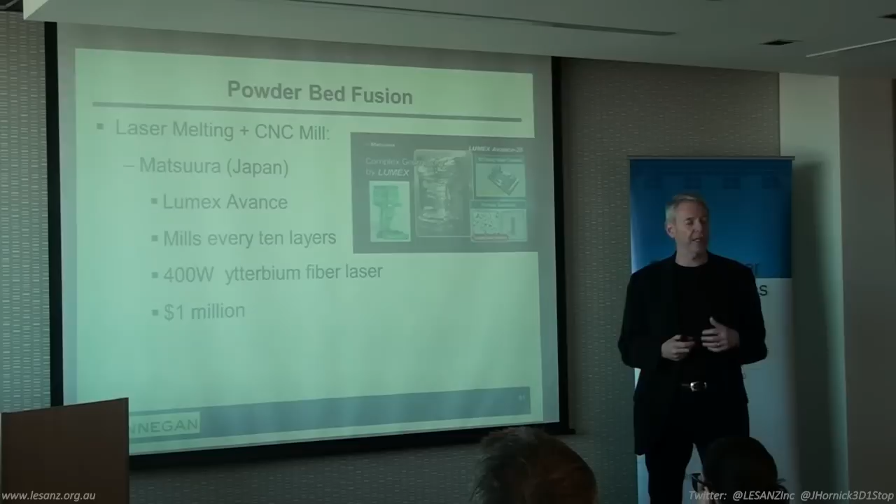There's another company called Matsuura in Japan that makes a hybrid machine that combines the powder bed fusion process with a CNC mill, and they mill every 10 layers. The machine costs $1 million, but again, they make beautiful parts come out of these machines.

Now that is all in powder bed fusion. The next to last type of technology is sheet lamination, and this is kind of like the freakiest type of technology. There's a company in Ireland called MCor Technologies, and what they do is they use regular photocopying paper in their machines, layer by layer by layer, which is cut with a knife, and you can have full color.

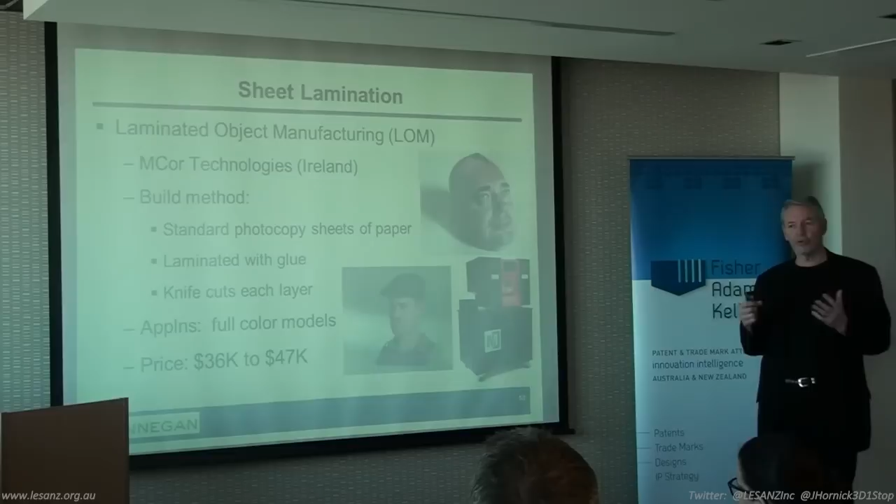This is a model, not the real head, but a model of one of their employees. It's another one of their employees, and what these are good for is models and prototypes. They are trying to get these into schools. They've told schools that buy these that they will supply paper for 2 years, all the paper that you need for 2 years. The price of them is very reasonable, $36,000 to a little less than $50,000. They can be full color.

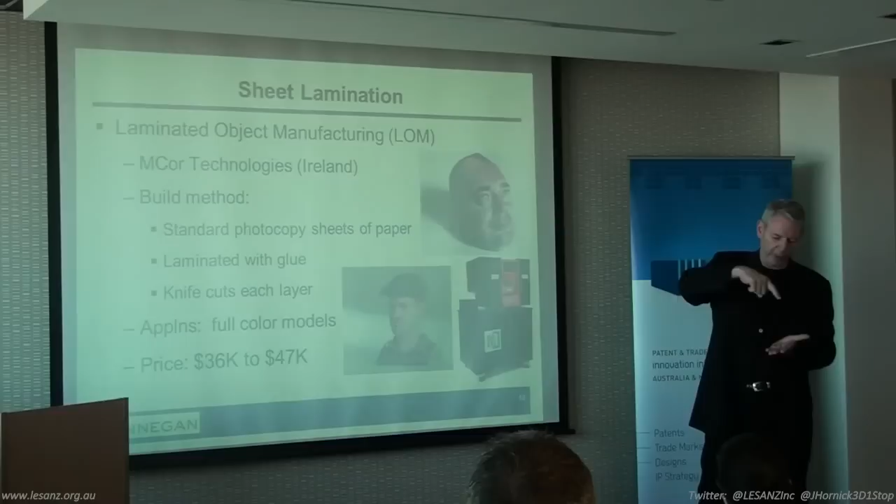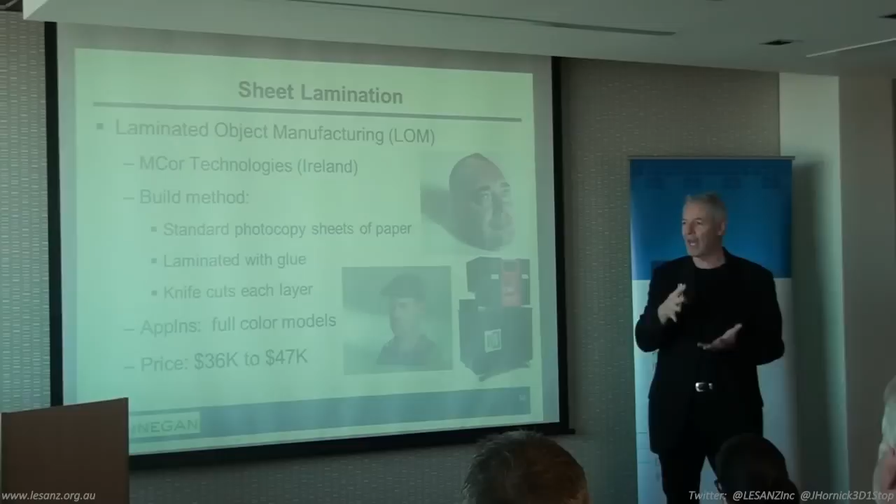I saw a spring that was made with this process. It was about this tall, a fairly loose coil spring, coiled about like that for its total height. And it was incredibly strong, with all the springiness you'd expect a spring to have, and it was made basically of layered paper.

Now, there are other companies that do sheet lamination. One of them is called Fabrisonic, and their process they call Ultrasonic Additive Manufacturing, or UAM. What they do is fuse layers of metal foil.

The great thing about this is you can embed sensors, or have a layer of some material that's a signal layer. For example, if it's something that wears, you build the outer layers out of the strong material, and as it wears, eventually it gets down to the wear layer that you can see, and now you know it has to be replaced or repaired.

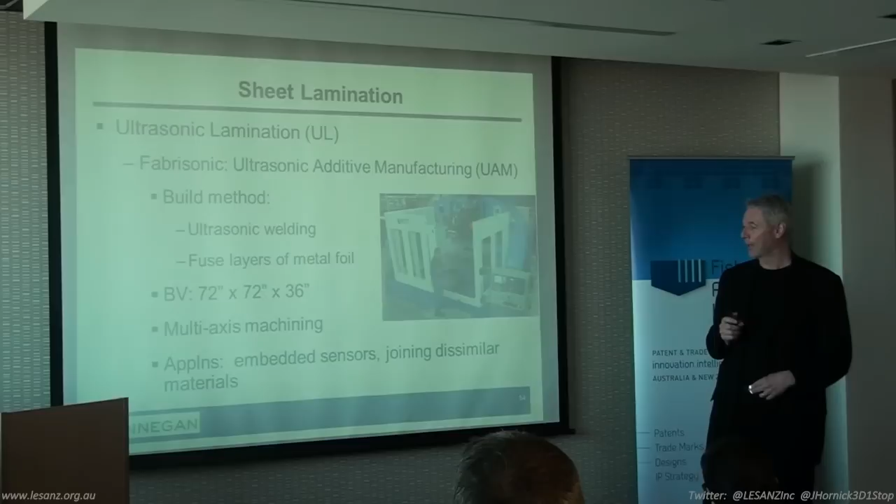So that's sheet lamination. The last type of process is photopolymerization. This is also called DLP, or digital light processing. It's also called stereolithography, or SLA. This is the original, very first type of 3D printing.

There are other companies that make a type of digital light processing: EnvisionTEC in Germany, DWS and Lithoz, and then Formlabs and B9 are consumer grade vat photopolymerization companies. Their machines cost about $2,000. Autodesk, a big company, has come out with its own consumer grade machine that they call Ember.

This is wrong—originally when it was first announced, it sounded like they were calling it Spark. Actually, they call their software platform Spark, and they call the machine Ember. Also, Lawrence Livermore is doing a small-scale version of this process.

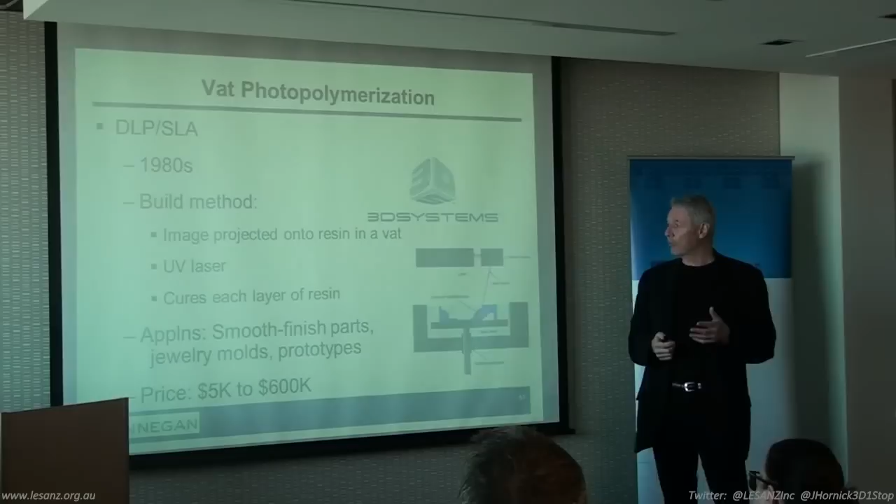As I mentioned, it was developed in the 1980s. What you have here is a vat of photopolymer, and then a laser that shoots, or projects, the image of whatever you're trying to build onto the surface of the photopolymer. It's a UV-curable photopolymer, so the laser is curing the layers one by one, projecting the image on the surface. So the part seems to grow out of the photopolymer.

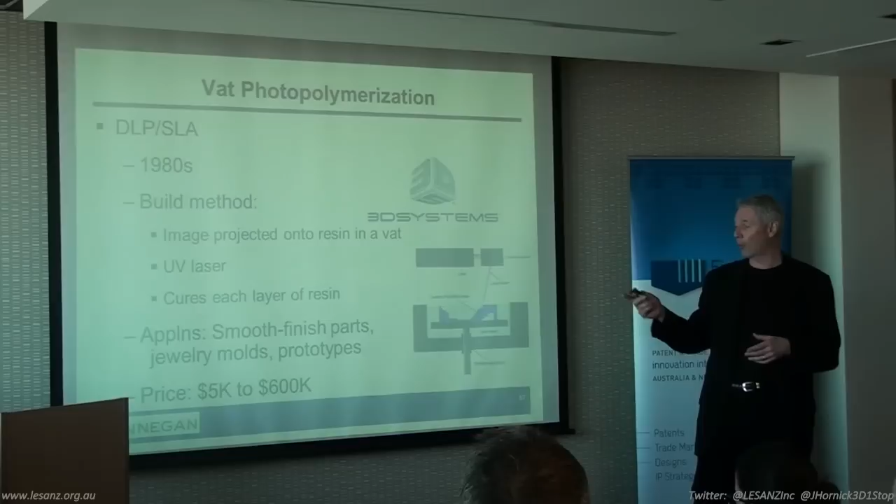And you get very smooth surface parts that come out of this. Some are great for finished part use, some for prototypes, and it's great for jewelry molds. They run in price from about $5,000 up to about $600,000.

Now, that's the 7 basic types of 3D printing technology. A lot of people view these as game-changing technologies, and they are. But there are some new processes that I call game changers among game changers.

And one of them is Voxel8. This is a startup from a woman named Jennifer Lewis at Harvard, who's very well known in this area. She's created this machine, the Voxel8, and this machine has the capability of printing the outside structure of a device and the circuitry in it.

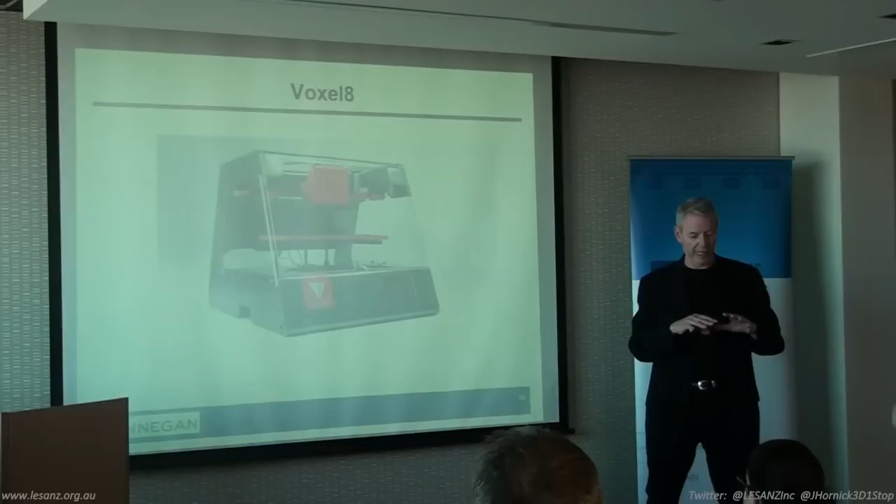Then there's a company called Impossible Objects. In their alphabet soup contribution, they call it CBAM, or Composite-Based Additive Manufacturing. What they do is take layers, sheets of carbon fiber or aramid fiber, Kevlar, or sheets of fiberglass.

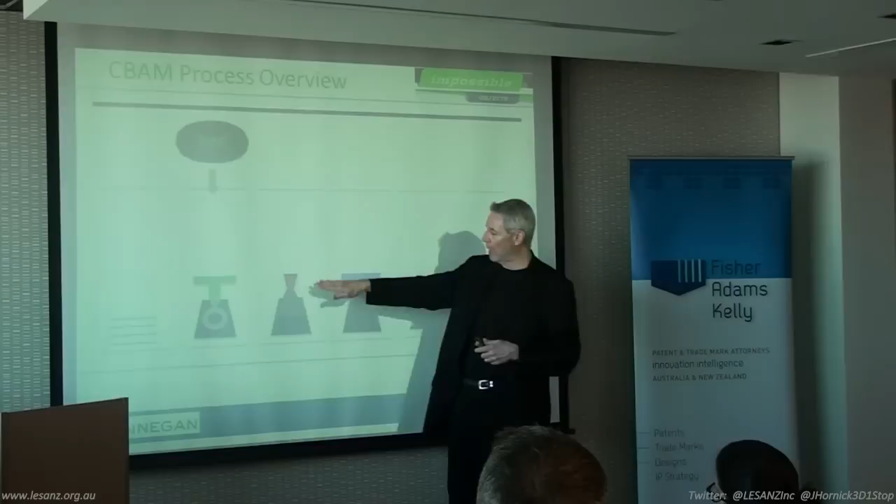And then they lay down powder on top of that sheet, and spray the powder with a proprietary agent—they won't tell you what that is. They brush away the extra powder, and then they compress the layers. They say that with this process, you can build functional parts up to 10 times faster than with any of these other processes.

The parts that come out of this process are 2 to 10 times stronger than parts from any of these other processes. And the strength to weight ratio is great, because even though you get a very strong part with powder bed fusion using metal, with this you can get a much lighter part with the same strength, because you're using layers of aramid fiber, carbon fiber, or fiberglass.

So this is a startup, and they're just starting now to try to commercialize this process. I think it has great potential. They're a great acquisition target, a great licensing target.

Then there's a company that just announced this process recently, I should mention Impossible Objects. I was a juror for the International Additive Manufacturing Award, and this was one of the submissions, and I was just really blown away by it. I think we'll be hearing more from them as time goes on. There was a submission for 2014 for the award that came out in early 2015.

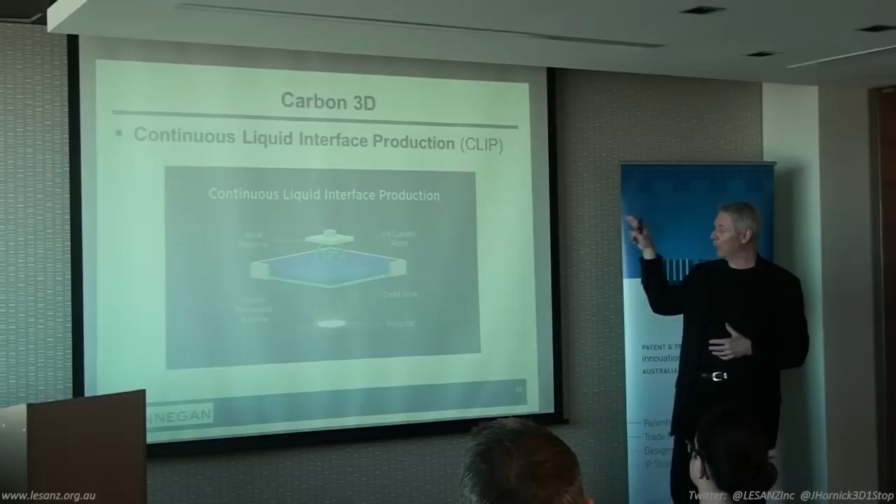Now Carbon 3D, what they have is a vat photopolymerization process, and it's widely hailed as a breakthrough, because supposedly the parts that come out of it are layerless, it's much faster, and you get a very high quality product. I don't know whether this is really a breakthrough. I think that it is—it could be an incremental improvement on vat photopolymerization, but their contribution to the alphabet soup is CLIP, Continuous Liquid Interface Production. Right now in the industry, people talk about this as if it's a breakthrough.

Finally, in the breakthrough category is Hewlett-Packard. HP's been saying for a while that they're going to come out with a 3D printer. In fall of 2013, Meg Whitman said we want to own this space, and we're going to make an announcement in June of 2014 of our 3D printing technology. Super secret—people who work in the company said they've never seen anything so secret before. Just before June of last year, they announced that they're not going to make the announcement in June. They said we're going to delay our announcement until October. So on October 29th of 2014, they announced what they call multi-jet fusion.

Multi-jet fusion uses 30,000 nozzles that spray up to 3 million droplets per second of material into a bed. They have an X and a Y moving carriage. The X carriage comes over and deposits material, and the Y carriage comes over and sprays what they call agents on it and gives it a shot of energy. Then the X carriage comes back and deposits more material. So they've combined material jetting, something like binder jetting—although they say they're not binders—and powder bed fusion.

Because the system can be reconfigured and those processes can be done in different orders, it can also be directed energy deposition. So instead of going down that single technological path everybody else is on, they're combining these technological paths, bringing to bear their decades of experience in 2D printing space and technology. They say that to make 1,000 gears as a sample takes 83 hours with material extrusion, and it takes 3 hours with multi-jet fusion.

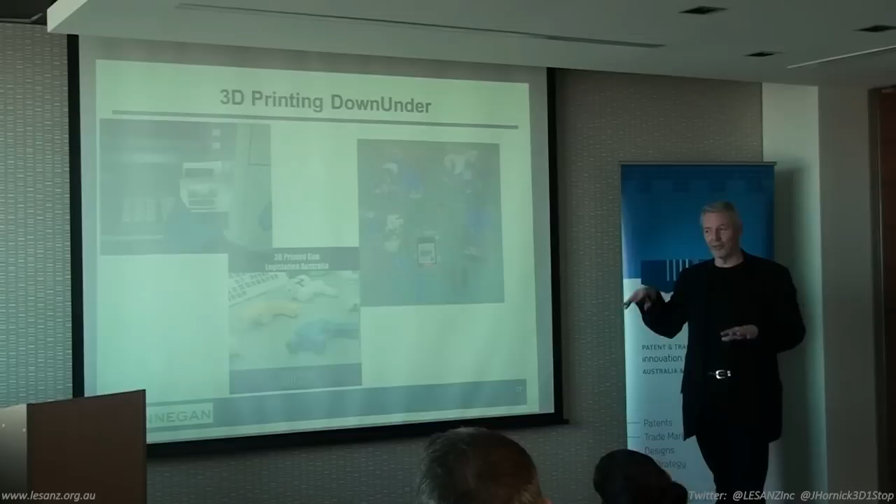And then right here in Queensland, police in a raid seized these 3D printed gun parts. They hadn't been assembled, but they were found along with drugs and real weapons and other criminal stuff. That was right here in Queensland.

Now, this though is what I call the bright side of 3D printing, and this is a 3D printed jet engine that was done at CSIRO, Monash University, and Deakin University, with the Arcam machine that's at CSIRO and the concept laser machine at either Monash or Deakin, I'm not sure which. This is the first fully 3D printed jet engine in the world. World-class work being done there at those three institutions.

This was done with a combination of cold spray and powder bed fusion, so these are fully dense metal parts.

And then only within the last couple of weeks, this was announced. This is the Rutherford rocket engine that was done in New Zealand by Rocket Lab Ltd. This is done in, it's either cobalt chrome or, no, it's in titanium. Beautiful piece of work, and that's done again with powder bed fusion.

Now finally, we have this cool bicycle. That cool bicycle right there, that's my bicycle. This bicycle was made by a company in Perth called Flying Machine.

I heard about Flying Machine around maybe February or March of last year, and I was scheduled to come here to speak in Melbourne in July of last year at the Inside 3D Printing Conference and Trade Show. I thought it would be really cool to ride a 3D printed bicycle into the room where I was giving my speech. So I commissioned this bicycle, and what they do is make custom bicycles. That's what they do. They have a website.